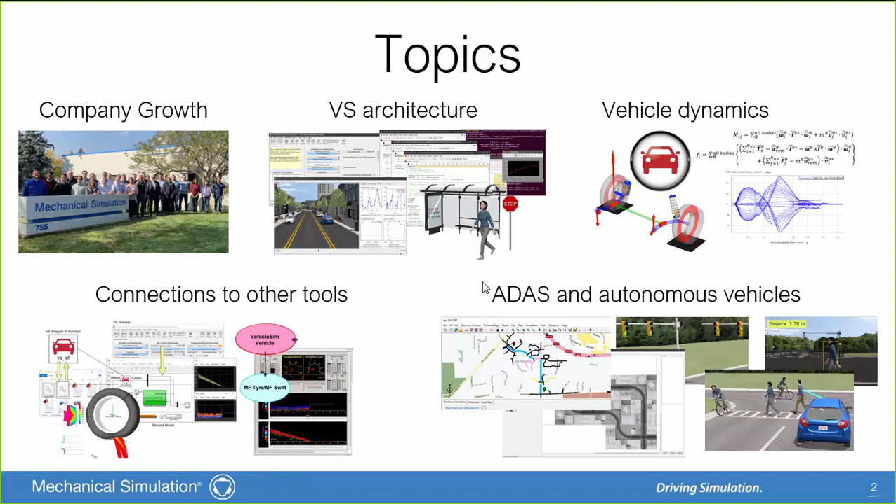One of the things that we have that we didn't a few years ago is an online support center, so that instead of just emailing Ben or Jen with a question, it goes onto our tech support system. It goes into a database so we can track the trends in what problems people are having or what features need to be added, and we can follow up, and we have options for users in the same company sharing information and so on.

With our new capabilities, we've increased our release cycle to make it a lot more steady than it used to be. We're now on a schedule where we make 2 major releases per year, December and June. We almost did it with the 2017 release, but we had some bugs to fix, so there was an early release for May. But in 2018, we were on target. We released 2019.0 on target in December.

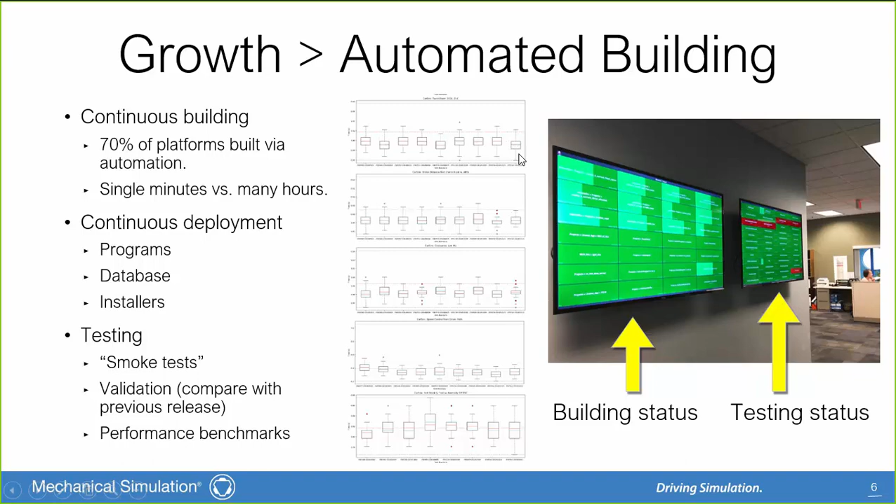We've made many minor improvements in our architecture, things like the database and the animator and so on. Some of those I'll be showing later on in the ADAS examples, but I've got a couple slides here that are substantial and worthy of being discussed by themselves.

A year ago, we added capabilities for running with Python, and in this release we've improved it quite a bit so that in addition to using VS commands within the solver when it's running, you can run Python. On Windows, it's available as part of our installation, and in addition to the VS commands, it lets you add equations and define new output variables. Python gives you function calls, looping, access to libraries done in other languages. I'll be showing later some examples using TensorFlow. The improvement is that we have access to all the VS Solver variables and all the tables.

It's completely installed in 19.0 in Windows, and it's supported in Linux. We had a last minute glitch, so if you want to run Python within the Linux version, you can call us and we can give you the details of what you have to download, but the hooks are all in the solvers to support that.

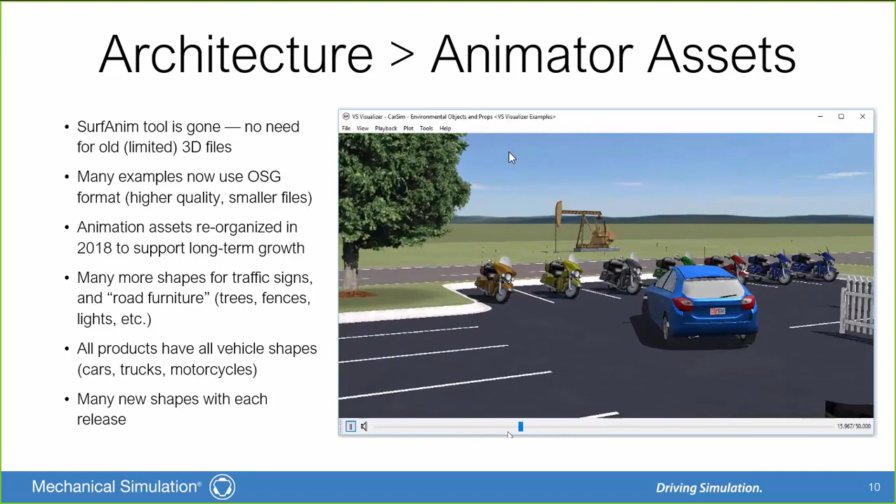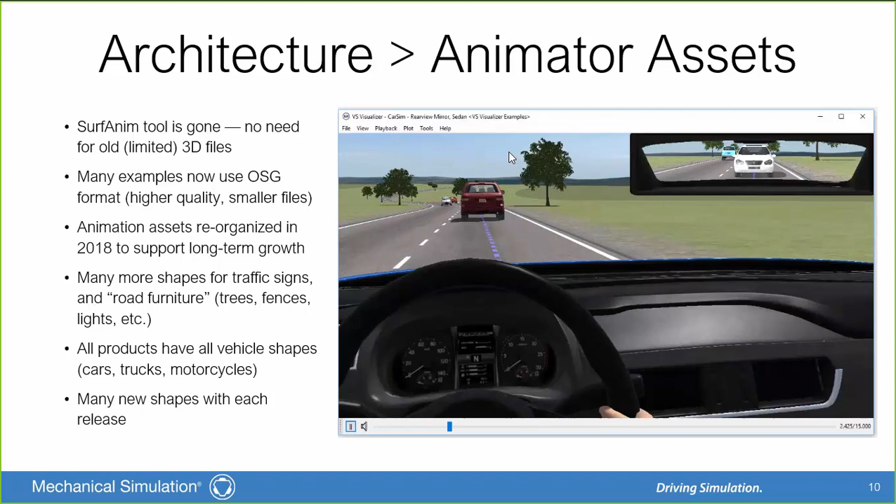Part of our packages are animations. We started out with wireframe animation when the company started. Then we had SurfAnim, which had surface animations. About 5 or 6 years ago, we switched to VS Visualizer, and we've dropped support for the old ones, which means we can now use new files that are much better. They're smaller, so we can put more of them in the system, and they look better and support advanced reflections and lighting. We've reorganized the way we provide these assets so that anything we provide in CarSim, BikeSim, or TruckSim is now available in all three products. We also have done some driving simulators, and some of the art assets we use for those are also included here. So you have trees, bushes, fences, bus stops, buildings, things like that.

Now, next topic, vehicle model improvements. We've been doing this a while now, and there are two big complaints that you users have about our software. The first is that it's too complicated - all those parameters, thousands of outputs, nobody understands the whole thing. Can't we make it simpler? The second problem: except for whatever my interest is, my specialty - in that case it needs to be more comprehensive. Can't you add more detail? So these conflict a little bit.

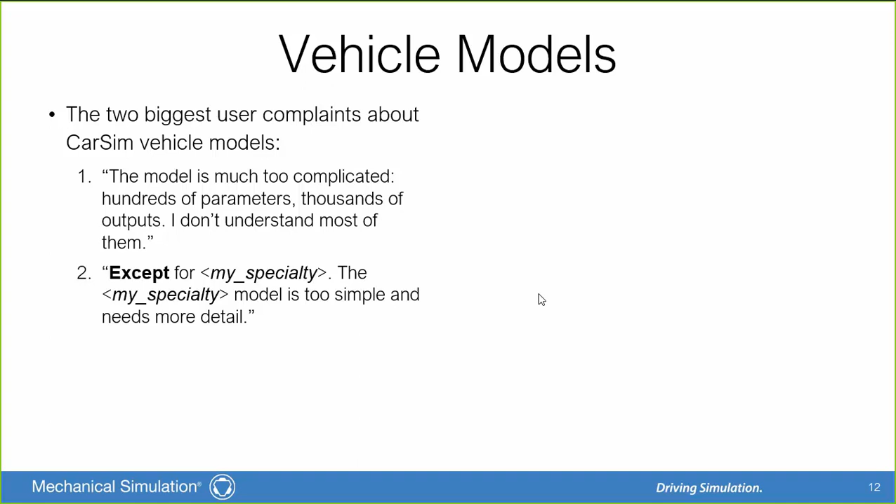Just so you know, our approach is that we make system-level models. Our goal is to have the model reproduce results that you would measure in the field in terms of getting the vehicle motions in response to what a driver does with steering, shifting, braking, gears, throttle. They're parametric models, so it's easy to do variabilities and sensitivities. They have to run fast. We support all these real-time platforms, and typically a CarSim model will be 15, sometimes even 20 times faster than real-time. But because we don't have the detail that you want in your specialty, we have many means for extending the models, which I'll get to later.

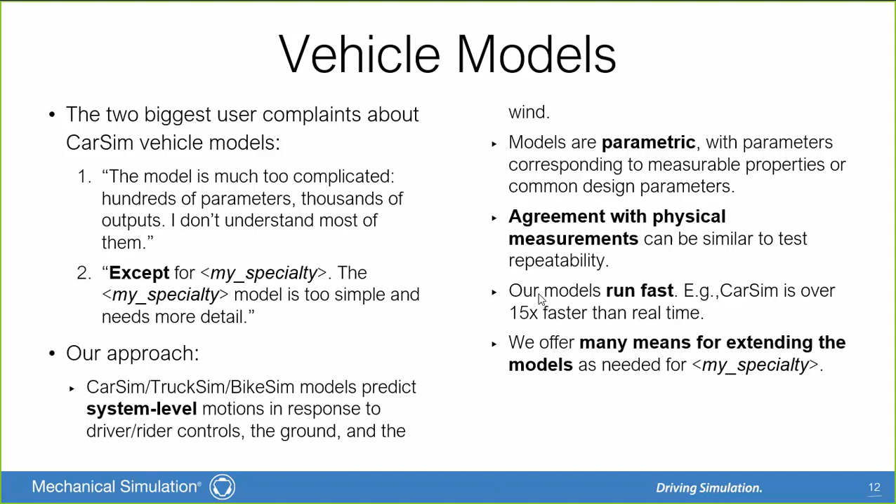Our models are thorough. We have all the 3D connections for the suspensions using rigid bodies, brake systems with lots of options, steering - I think we have 8 combinations of model options for the steering system. Our built-in tire model is pretty thorough, plus you'll see that we support many external ones. We have powertrain, aerodynamics. Something we introduced a year ago is modularity in CarSim and TruckSim. That's opened up a lot of opportunities that we're starting to show off here.

Now, when we introduced CarSim 18.0 - CarSim, as you may know, supports trailers. You had in our GUI a choice of a trailer with one solid axle or a trailer with two solid axles. Our solvers actually supported a lot more options when we became modular. We now just have one CarSim DLL that plugs in, and then you pick and choose which options you have. In 18.0, you could do a 3-axle trailer, but it was hard. Now it's easy. We're looking at the trailer screen up here - this is a new screen that supports 3 axles, and they can be any combination of solid or independent.

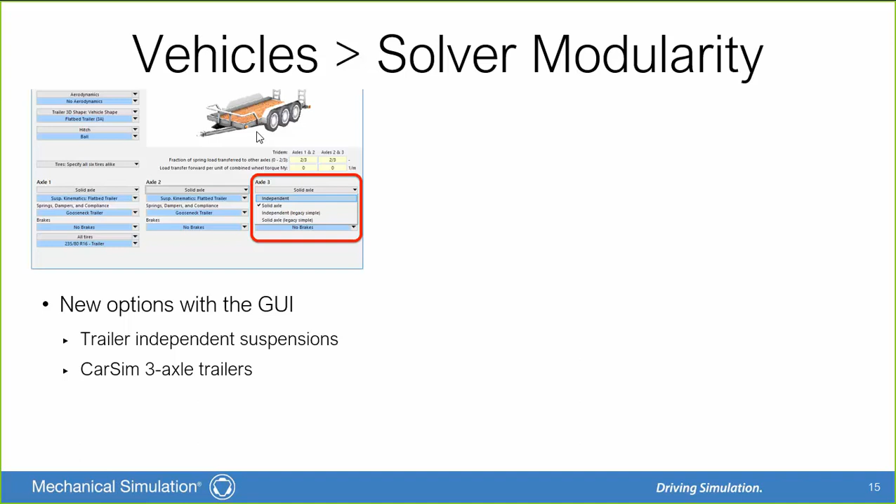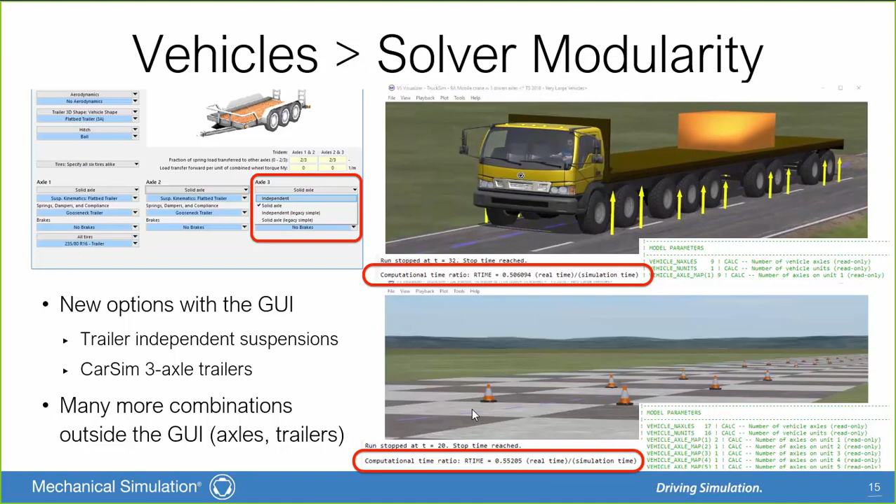We support these, and they run surprisingly fast. Both of those models run about 2 times faster than real time on a Windows machine.

Here's a summary of what these modules are. On the right, under type, we have 4 types: the lead unit sprung mass, a semi-trailer sprung mass, suspension with steered wheels connected to a sprung mass, and the same thing but with wheels not steered. We provide that option because when we get to the big TruckSim models, having suspensions where the wheels are not steered means a lot less calculations and the models run faster.

So to go through these quickly, for CarSim, for the lead unit, we have a basic one that is 6 degrees of freedom. We have that plus a mounted engine that has 6 degrees of freedom to get realistic interactions between the engine torques and the sprung mass and some vibrations. And we have a frame twist with rails on the left and right that you need to get accurate reproduction of sport vehicles, open wheel race cars.

In TruckSim, we've got the basic one plus the frame twist, which is necessary because heavy truck frames are not rigid. And the one with frame twist also has a suspended cab. For the semi-trailers, they're either rigid or with frame twist. And then each kind of sprung mass needs connections to the suspensions that are different.

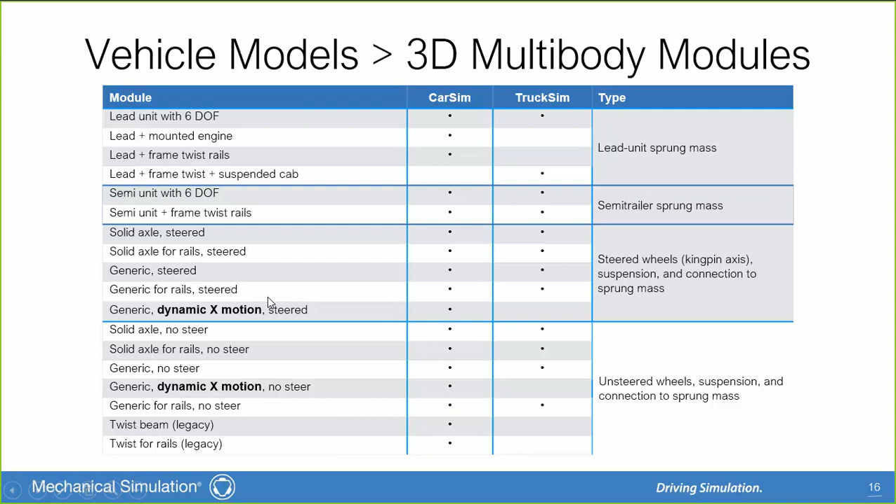So we have to have a solid axle steered for the simple one, solid axle steered to go with rails. We've added a new option in 2019.0, Dynamic X Motion, that I'll talk about in the next slide.

When we went to this modular concept in 2018.0, we were trying to address the need to have a more accurate or more representative model for twist beam suspensions. There was a working group with 4 Japanese OEMs that Dr. Watanabe from Mechanical Simulation was part of.

So the change is basically that we extended our old independent suspension model so that instead of having 1D functions like toe versus jounce and camber versus jounce, we made them 2D functions. So it's toe versus jounce on this side, and then possibly another independent variable would be jounce on the other side. If you don't have the data for that, they revert to 1D tables like we've always had. But now they're 2D tables, so we can get some interactions quite easily just taking the KNC data that's generated routinely. And if you don't have KNC data, you can use something like SuspensionSim or Adams to do the detailed model and replicate the KNC tests.

The result after a year of using this has been real positive from the members of the working group. They're finding good agreement between the proving ground results and the CarSim results.

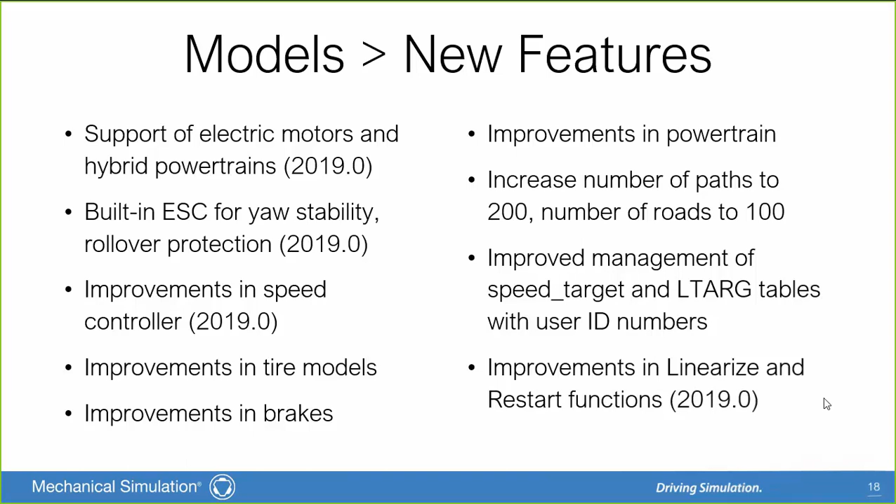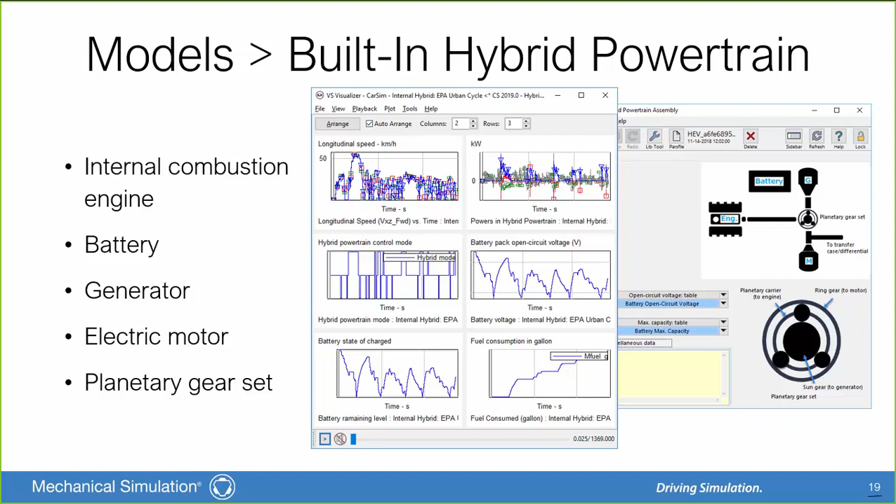Okay, the hybrid powertrain. This is where we are using an internal combustion engine and an electric motor with a battery and a generator and a planetary gear set to connect them.

Now the good news is it works. The bad news is it's kind of slow. Here's a log file for that run that was made in Simulink.

So this is running an EPA cycle. It's 1369 seconds long, so 1200 seconds would be 20 minutes. So this is 20 some minutes. It runs a little more than 2 times faster than real time, which means if you run this on my machine, it's going to take about 10 minutes to complete.

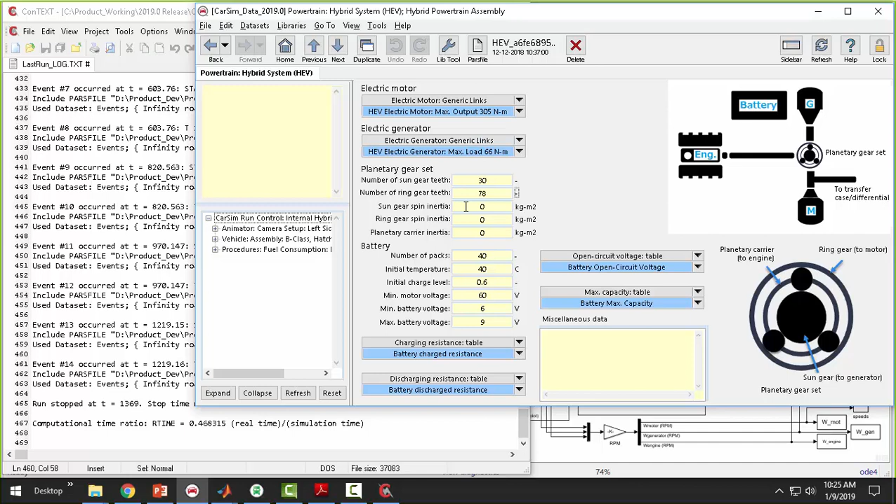Now what we've done for the 19.0 is take those equations, the model, and build them in. So now we've got the engine electric. Here's the engine model, just like we've always had. And here's the powertrain assembly. We have the battery, the engine, generator, motor, planetary gear, some parameters involving the planetary gear, summary information, and lots of tables that have nonlinear relationships.

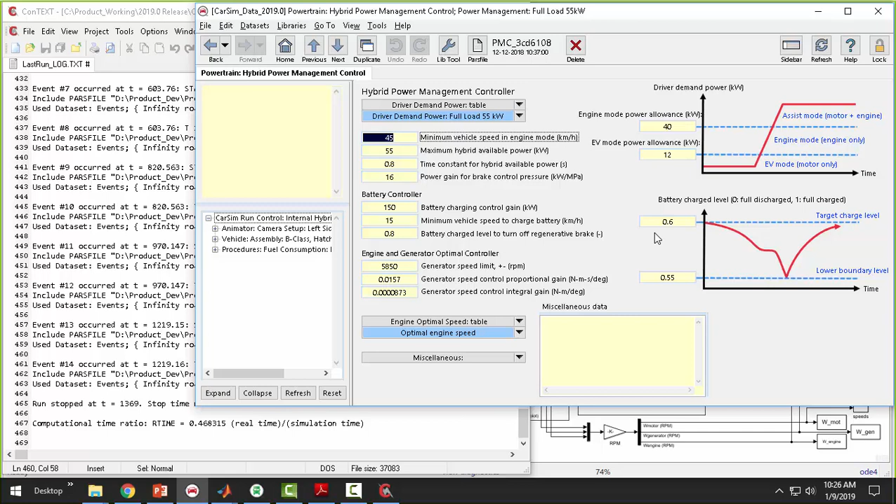If we go up, that's the assembly. The power management also is built in. It has a new screen that's basically telling whether the internal combustion engine should be powering the wheels, recharging the battery, or maybe turned off. And this also has just lots of tables in here—or not a lot, 2 tables.

So how does it work? Well, first the efficiency. This time, instead of running twice as fast as real time, we're going 10 times faster—I'm sorry, 5 times faster. Simulink was really slowing it down. This means our 20-some urban cycle simulation is going to be done in about 2 minutes.

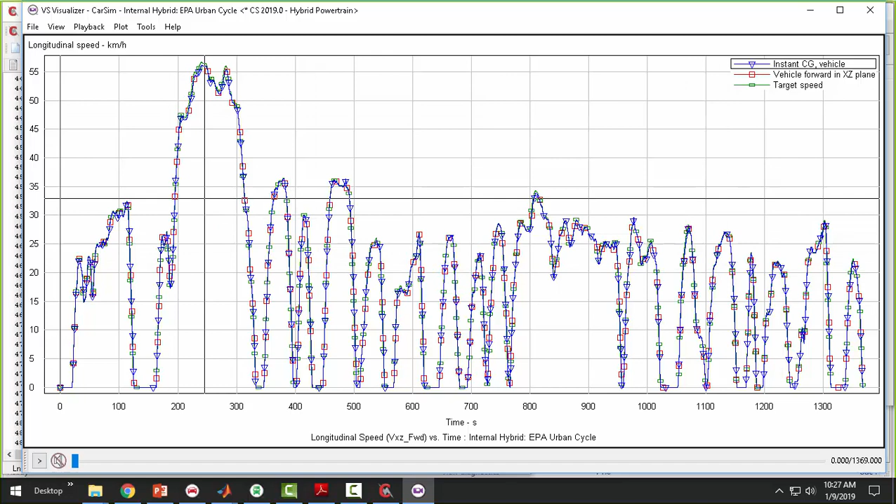And these are the kinds of results that we get. This is the cycle up here as the speed is going over that period of 20 minutes. Then we're getting information about the battery and the efficiency, fuel consumption, things that you're interested in if you're using a hybrid simulation.

Okay, the next topic, the next improvement, is to build in electronic stability control. We've had examples doing this with VS commands. Now, since they've been required by law for cars since 2012 and in trucks for just a few years, we're putting this in. It's a simplified version similar to our ABS controller for brakes. So here's an example in TruckSim.

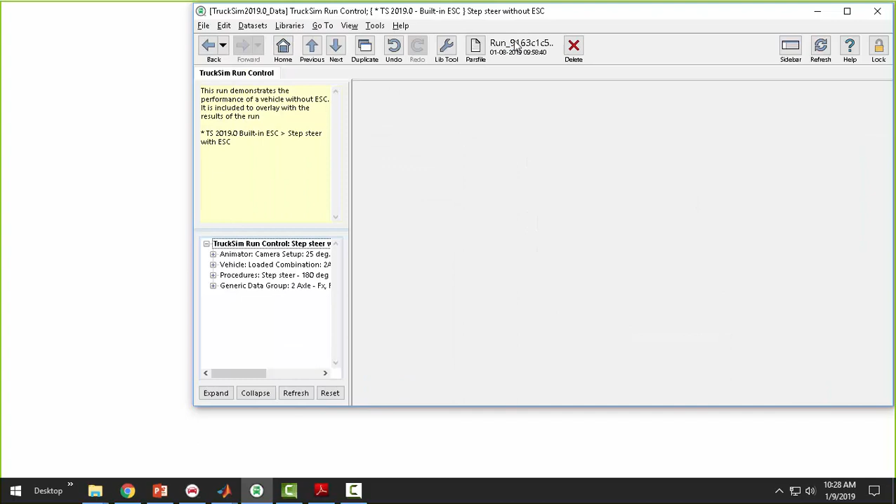So now we'll look at it with the controller on. Okay, we see the icon, the stability heads-up display coming, and it goes through the maneuver without rolling over. That's good.

We got the controller algorithm from one of our customers, a truck company, to use in a driving simulator. So it's been cleaned up, so it's fairly generic and easy to apply in different applications. It's predicting what the yaw rate and the lateral acceleration will be.

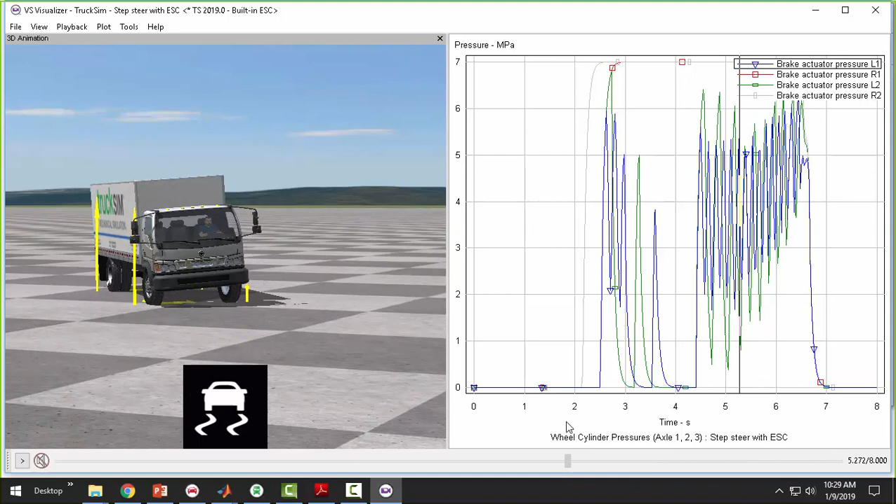So you can see here that when the predicted yaw rate, which is in blue, is small, it's off. When it climbs up, the controller kicks in. That was the angular velocity. Here's a similar thing for lateral acceleration. And then this is the braking that is applied. So now the controller is in there, selectively triggering the brakes to reduce the acceleration. It's lowering the speed quite a bit.

Let's see, where's my speed? Ah, yeah, here we go. So the result of this is that it does slow down, because that's kind of the only surefire way to stop the rollover. Now in CarSim, it's often used for things like sine with dwell testing.

I want to show a sequence of sine with dwell tests that's done for—oops, I need to go to that data set, that is miscellaneous. Here we go, sine with dwell. The first thing you do is steer, ramping up the steering wheel angle linearly until you reach 0.3 Gs, and then you reset and go the other direction until you hit 0.3 Gs.

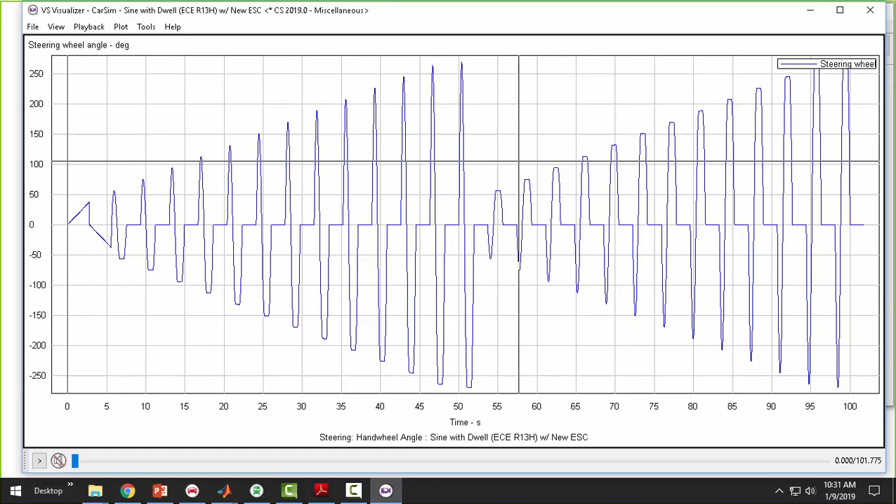In making this simulation, we turn writing to the file off during the transients between sequential tests, so you don't see the uninteresting parts—we just see when it's doing the tests. And then it gives this sine with dwell waveform that increases as you go along until a limit is reached, and then you do it with the opposite sign. We're looking for results like this where it remains stable and controllable the whole time.

When we look at the controller, it only has 3, 6, 10 parameters here. One parameter is a vehicle understeer gradient—that's what it uses internally to predict what the response is going to be.

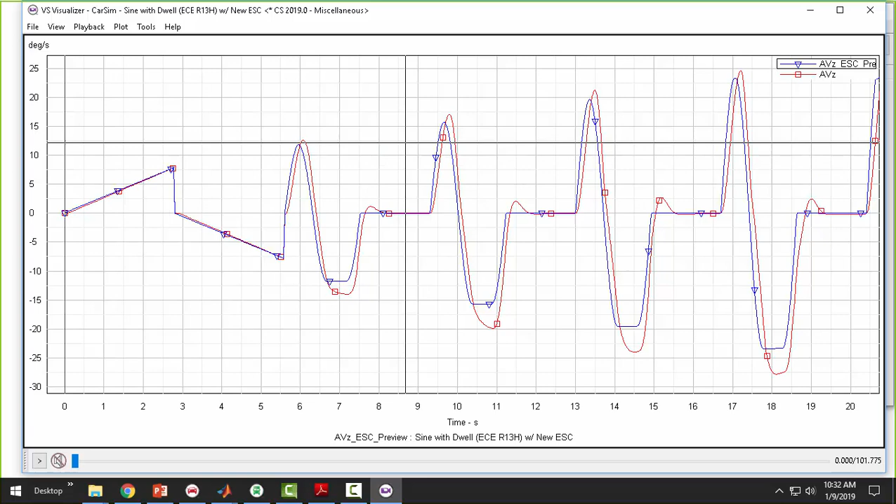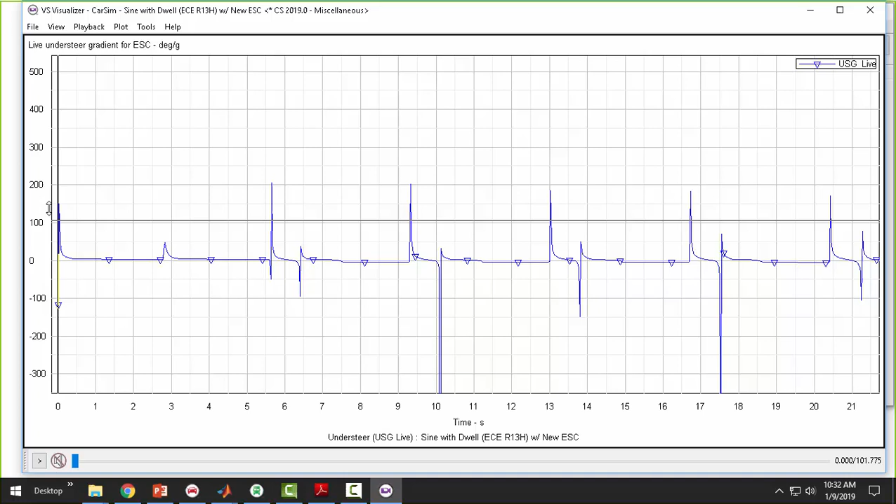So let's go back at these plots here, and we'll look at, say, this is the angular velocity as a function of time for those tests. Red is what it really is, blue is what the controller thinks it will be, and it's right on for the early stuff. The reason we're able to match it pretty closely is because one of the output variables is the understeer gradient as calculated for the assumptions of that controller. So I'll zoom in and look at this.

Show the values up there, and you can see 3.23, 3.189, and then we go back and see that the parameter that was put in here was 3.19. So it's mainly doing a test like this, you can see what the understeer gradient is and put it in there. So it's very easy to tune this controller to your vehicle. It's the same controller in CarSim and TruckSim.

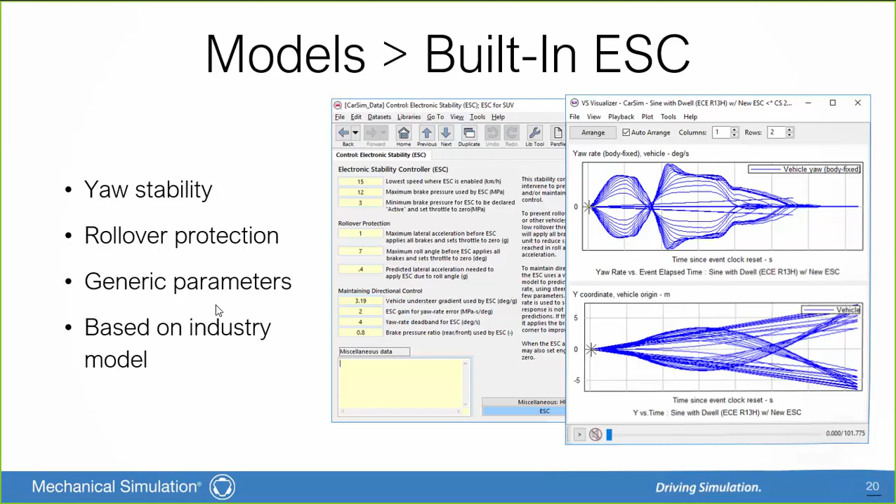Now the way we connect in MATLAB, LabVIEW, and ETAS is that the solver runs in that environment, but it's getting data from one of our standard databases. So if it's CarSim, you would have the CarSim database installed. If you're, say, in Simulink, you're running under Simulink, but it's getting data from the CarSim database. With the FMI, we support that also.

But with FMI, we also have the option of making a standalone unit that's completely self-contained. So that has all the vehicle properties, anything that's specified from the database. You make that FMU and you give it to a colleague on a different computer that doesn't even have CarSim installed. They can run it in their environment. Now they can't change anything. So it's mainly useful for control engineers who view the car as a black box that just has inputs and outputs.

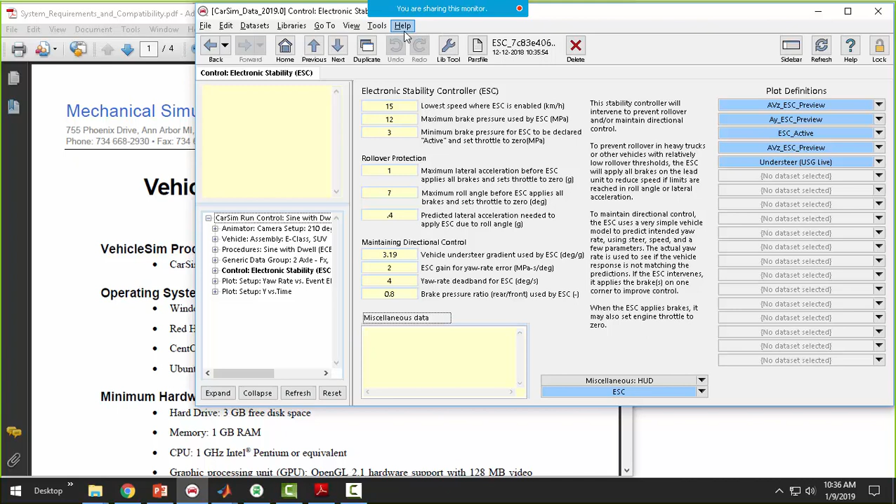We run on 8 real-time systems that are listed here. We support a lot of third-party tire models. Okay, when it comes to what we run with, up here in the help menu in our release notes, we have system requirements. This is the document that you get, and here are a lot of the real-time systems. This table lists most of the tire models. They're all available on Windows. Some are available on dSPACE and some are available on Concurrent. It depends what version. It also depends which of our products, CarSim, TruckSim, or BikeSim.

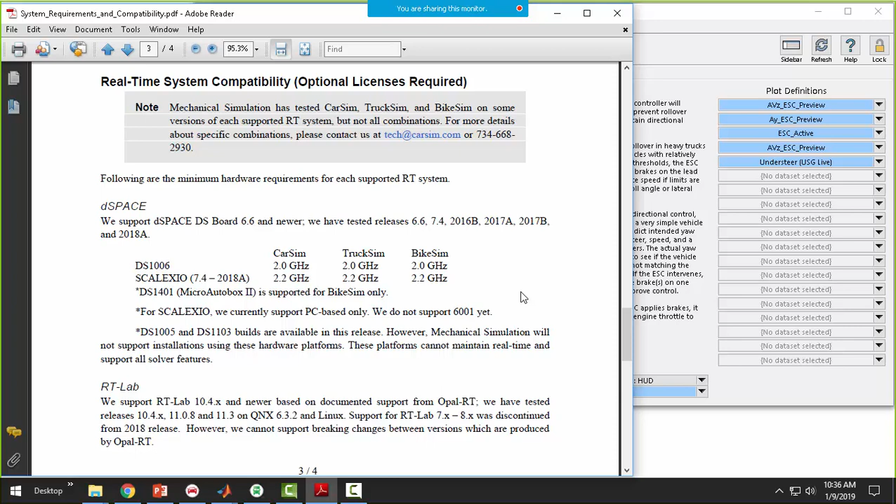We have information in this document about all the real-time systems that we test. We try to be up to date with the current releases, although very often if there's a new release from dSPACE and they've changed things, you might have to wait till our next release so we can implement those. But I think we're pretty much caught up now. This year we've added support for the Michelin TaMe tire, and we have taken what used to be the CarSim plugin for Epic Unreal and made a VehicleSim Dynamics plugin, and I'll be showing that later.

Connecting to outside software, we have lots of application program interfaces, APIs. We plan in the next few months to make a bundle with these to make it easier for programmers to have an SDK, a software development kit, but they exist right now and are in wide use. The Solver API lets you run our solver from external software. That's used in driving simulators and some optimization things.

A few years ago, we standardized the way we connect with tires. There's an old standard called STI that was made for Fortran maybe 30 years ago. We've taken our own version of it that's compatible with C function calling protocols. That's what we use for most of the tire interfaces, and it's been used by some of you OEMs to connect your own tire models into CarSim and TruckSim.

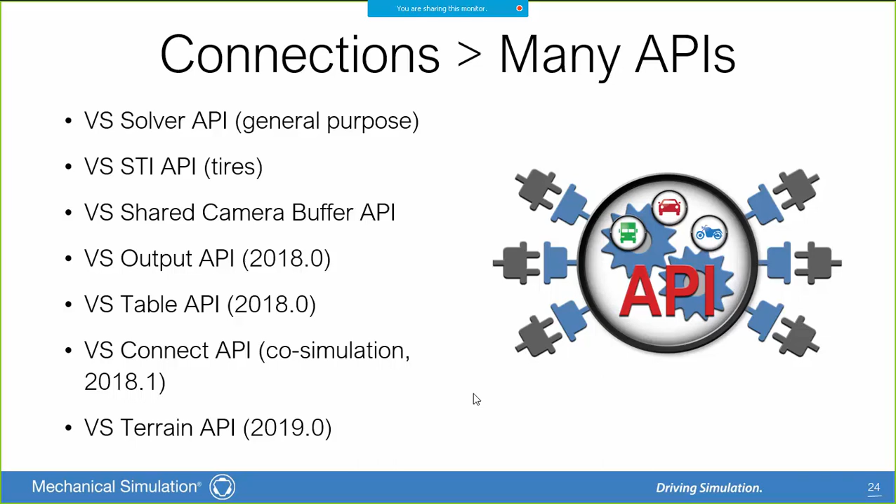And new in this release is the Terrain API that lets you make use of ground information from outside sources in a generic way so that you can connect your own ground to our stuff without us knowing about it.

Okay, now the rest of the presentation are examples in the area of ADAS and autonomous vehicles. But before I can show anything, I feel compelled to give a quick review of the ways that we describe these things. Our vehicle models are based on physics. The physics equations all use global x, y, z coordinates, yaw, pitch, roll angles for orientation.

When we're talking about traffic and intersections, it's more convenient to use path coordinate systems. So if we have a path, the coordinates are station S, where you are along it, and L, lateral distance from it. You'll see this with some European technical papers. They'll call them S and T, but we use T for time, and we're not going to give that up, so we use S and L.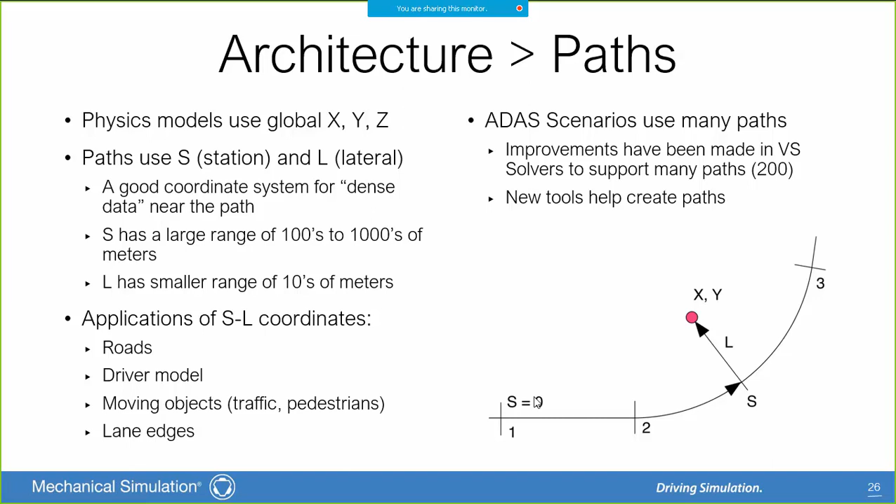This is real good for defining movements of traffic vehicles. It's necessary for defining roads. We've used it for 20 years for our driver model, more recently for the moving objects and lane edges. And a lot of making ADAS scenarios involves setting up paths and connecting roads.

Now here's an example; this was made in our previous release. Notice we have walking pedestrians that are moving. Events are being used down here to stop the car, wait for the pedestrians and the bicycle to clear it, and then speed up. Now I want to show a few other things, so I'm going to kill that and go live again. Okay, we'll look at the same example here, and I want to talk through it a little bit more.

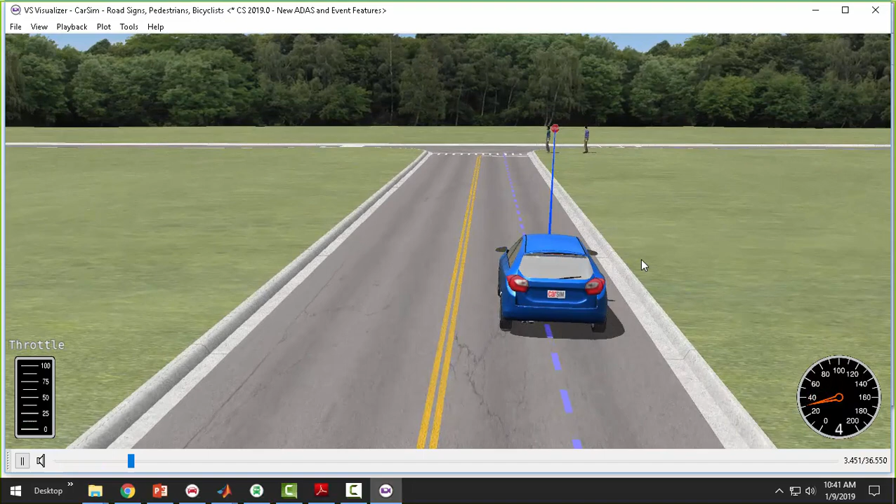So we see that we have two pedestrians waiting here. Neither of them are moving. They're both showing realistically standing. They're not like walking and frozen. Now the woman starts walking. The guy starts walking just a little bit after she did. They're walking at different rates. He's going to catch up with her.

As they're walking, their feet touch the ground and stick to it. They're not doing any Michael Jackson moonwalk kinds of moves. They're maintaining that realistic motion. When the bicyclist comes around and she turns, she's leaning into the turn. The lean is physically correct. It's v squared over r, the lateral acceleration, divided by g. Take the arctangent of that and you get the lean angle. The other biker keeps going straight.

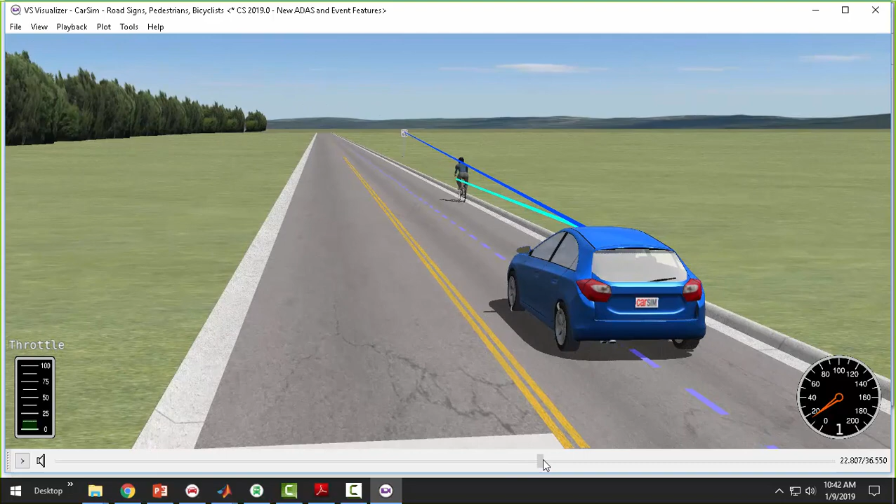When everything is cleared, we go through the intersection. We see the blue beam connecting with a speed limit sign up there, so it's changing the speed used by the controller in the car. Now it detects the bike, and you see that it's going to give her some respect here, moving to the left to give some clearance.

So the way we do that is with a new feature that simplifies that. When we have our events now, there is a group ID that you can check. And this ID is bike lane. The condition here is saying that if our speed is more than 5 meters per second and our closest object is a pedestrian and the pedestrian is closer than we want them to be, then we will go here and change the target that we're using to drive, and this is updated every time step.

It will move it to the left. We'll keep doing that until the type of the closest object is no longer pedestrian. Then we go back. So we'll look at those same events here in the echo file at the end. And this is a new feature, the event ID. The one that has the ID of 100 is watching the stop sign.

So is our closest object a sign? And if it is, is it a stop sign? Or is it a speed sign? Or is it a red light? Or is it a yellow light? Then we have another group here with ID 110, and that's our bike lane. If this is not 0, then we would do something, and this can go back and forth.

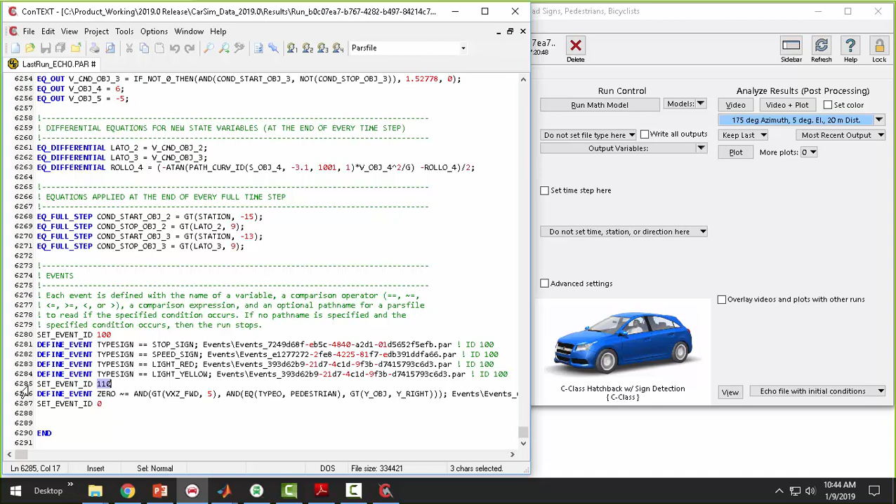Now, if you've used events, you know that you will sometimes want to just reset them all. And that gets complicated if you have multiple subsystems in there, or if you're looking at different things, like we have the bike lane detection and we have the sign detection. So with these IDs, we can reset one group and leave the other intact. And that happens in this example. If you look at the log file, you'll see that there's some resets involving the sign detection, but this other sequence where it's looking for the bike position stays intact the whole time.

Okay, go to another example here showing a new feature. This is traffic signals, and we'll take a look at the existing one first, which is not what we ship. It's one that I modified.

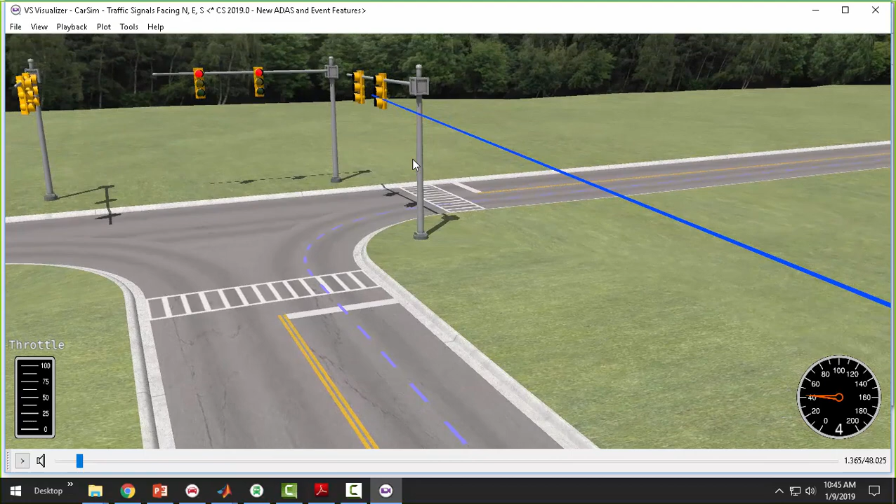We have 3 lights up here. We're looking here at vehicles going south. The straight road is north-south. The Ego vehicle is coming from the east, driving west. There's a red light facing us and a green light facing south.

You see the blue detection ray there. It's seeing both of them. Now that's not good. It's going to get real confused because we want it to only see the red one. And in past versions, we put some invisible objects in there to block it, but we have a much cleaner solution now in 2019.0. We'll look at the traffic lights here.

So this is the data set used for all 3 of the traffic lights. They're just located in different places. And so we've got where it's located using symbolic stack things, so it's reusable. The type of shape is a segment. In all the past versions, you had 2 options, a cylinder or a rectangle. Now we have 2 more.

The segment one is what we intend to be used for signs. And this has a limited visibility angle. If I say 40, that means that its whole field, kind of a field of view from the object side, from the target side, is 40 degrees. That's 20 degrees on each side. So if you are facing the stop sign, you can see it. If you're within 20 degrees of facing it, you can see it. If you're more than that, you can't.

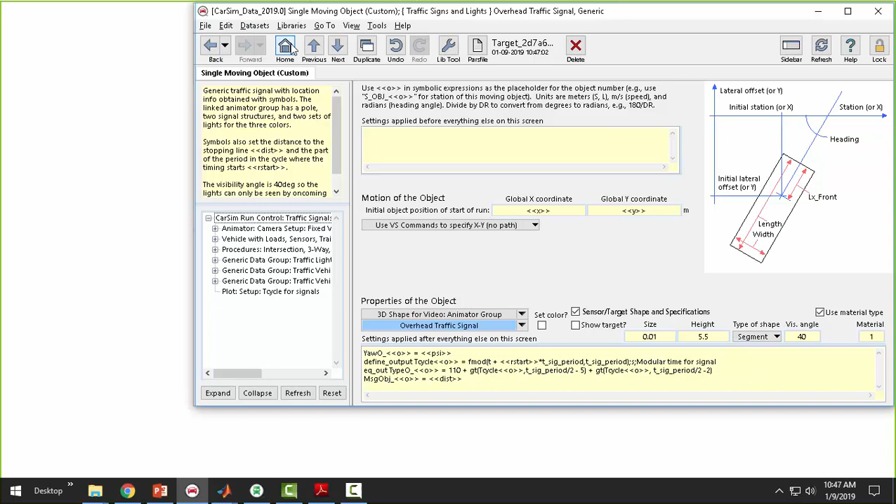And I said stop sign, I should have said traffic light. So if you're within 20 degrees of facing the traffic light, you can see it. Otherwise, you don't. So we'll redo that run. Look at the video. Now we don't see the green ones because we're more than 20 degrees away, but we do see the red ones.

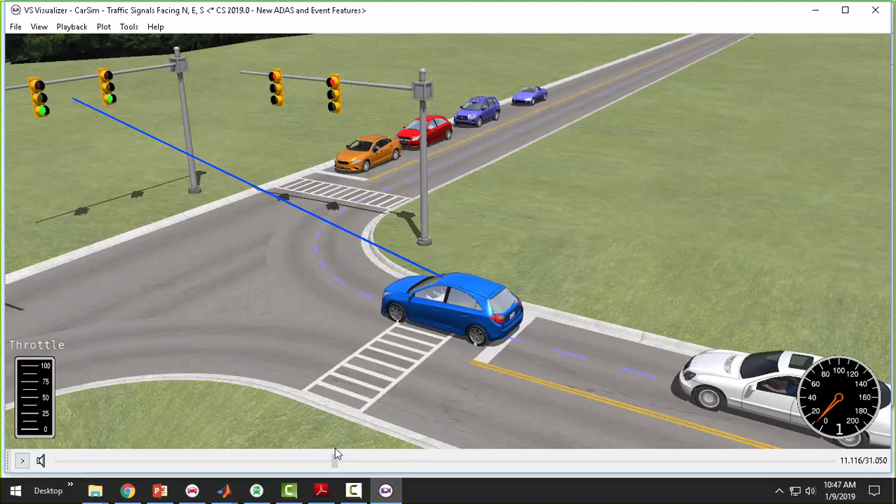Now you notice that those traffic vehicles are slowing down pretty realistically there. That's another big improvement we made with this release. We also see that the traffic vehicles following our blue Ego vehicle slow down, and then when it speeds up because the light has turned green, they follow it well.

Also, look at where the rear wheels are. When our driver model tries to follow the dashed blue line there, it keeps the center of the front suspension pretty much on that line, and the rear wheels track inboard due to off-tracking. The rear wheels are trying to follow where the front wheels are. And that just comes from the physics of the vehicle dynamics.

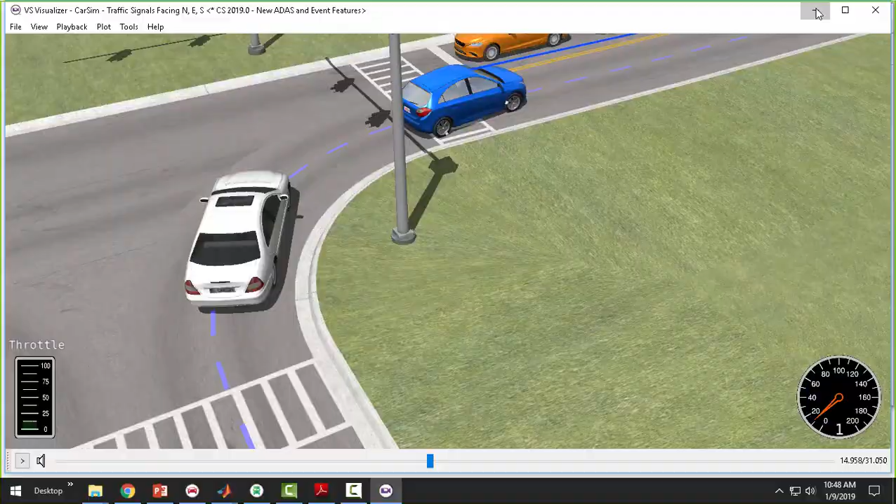These other vehicles don't have full-blown vehicle dynamics. This is not a CarSim model. This is a moving object. But it's tracking realistically. The front wheels are following the dashed blue line. The rear wheels are tracking inboard. So let's take a look at how that's done. I've got traffic vehicles here following the Ego. Here's the one right behind it.

Now in the past, we've had 6 options here for controlling it. The first 3 control position explicitly. That's all we had maybe 5 years ago. It had no true degrees of freedom. It just went where you told it to go. So we could put a formula for station, like be some variable distance behind the Ego vehicle. But the only way you would get speed would be by doing a finite difference.

Then we made speed a built-in variable, and if I choose one of these, it adds a degree of freedom. So now we would be controlling the speed, and then the solver would numerically integrate that speed to get the position. And now with our new one, we've added another option, that we will control the acceleration. That becomes a degree of freedom. And that's what we're doing up here.

This is a term in the documentation, a speed error, that the built-in controller is going to change the acceleration to try to maintain a following distance that's speed dependent on what's in front of it. So when we do that, we have a degree of freedom for the acceleration. That's numerically integrated to give us the speed. That's numerically integrated to give us the position. So that's 2 degrees of freedom.

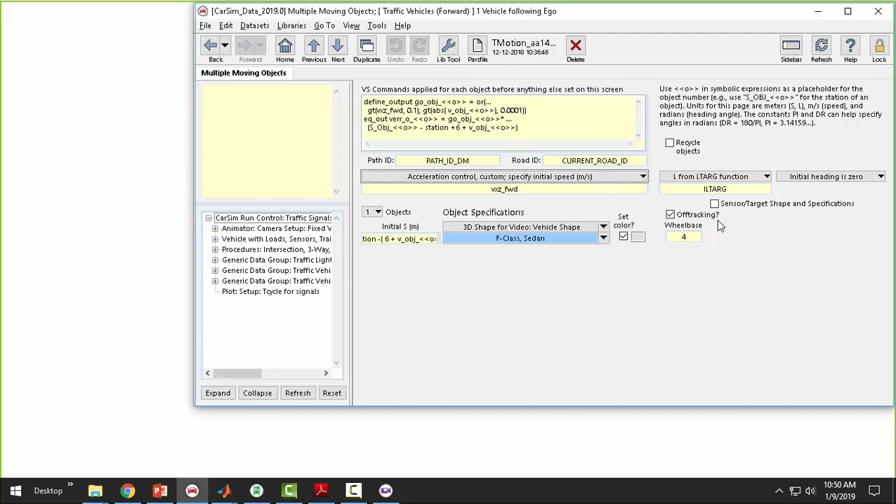And then within the last year, we had added this off-tracking option. We revised that a little bit with this release to make it more robust. That is adding a differential equation for the yaw angle. So the yaw rate is integrated to give the angle, and that gives us the realistic off-tracking that we saw.

When we do the caravan, it's real simple. We just have each one following the guy in front using the same control law. The cycling that we have for the light is real easily changed. A whole cycle is normalized to be 1. I had it at 0.7. I'll change it to 0.4 and rerun it.

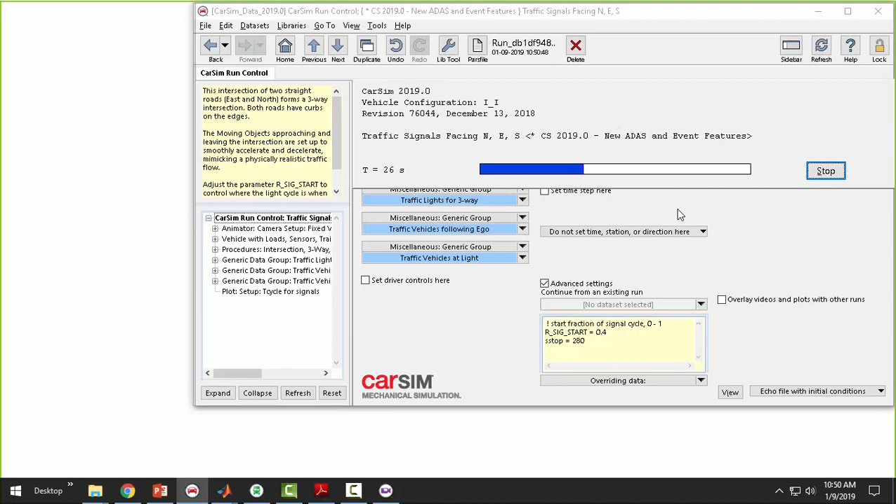So here we have some speeds. The control for our lead vehicle here was smart enough to know that it has to come to a stop if it's a red light, and it can keep going if it's a green light. Because it's acceleration control, if the thing switches, it doesn't have a discontinuity. It maintains continuity by staying within reasonable acceleration limits.

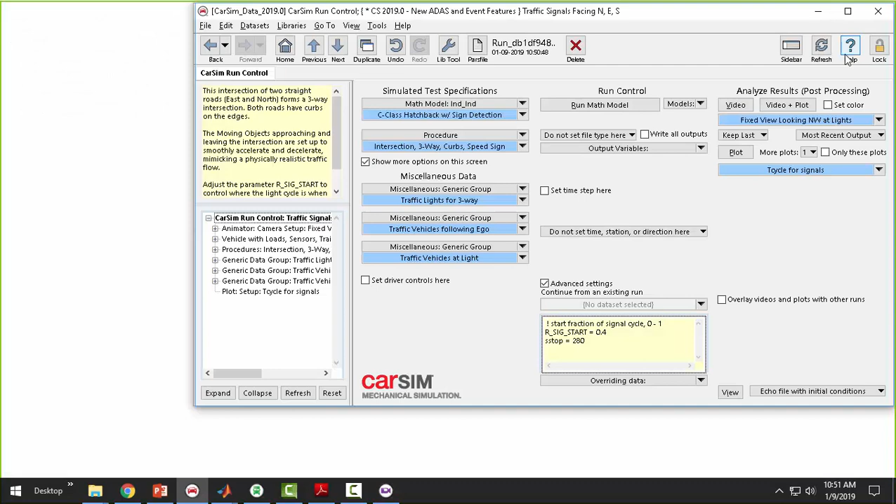And now we have the red light over here. These guys stop in a physically believable manner. And then when it changes to green, they all accelerate to follow it. So that's 2 examples that we have, and I've got 2 more.

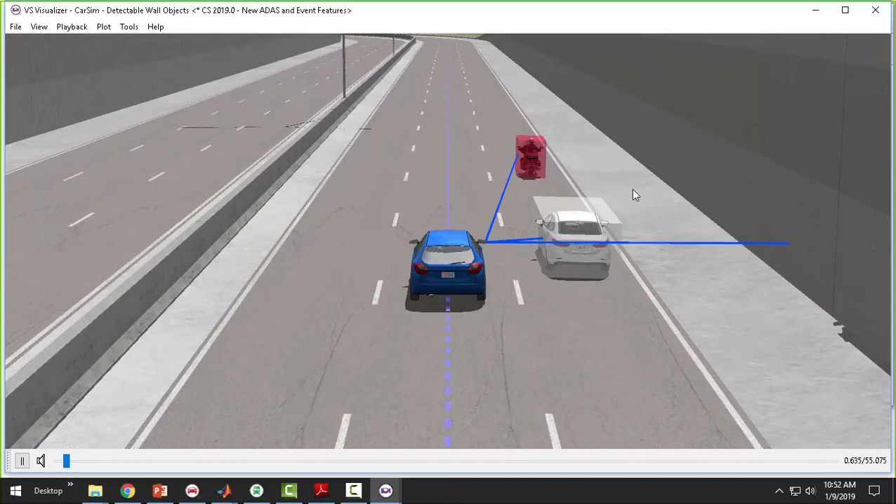A request that we've had for quite a while, especially from Japan, is to be able to have walls to the side of the vehicle. So here is an example. So we see that we have our Ego vehicle here that's blue, a motorcycle that's red, a white vehicle, a wall, and an access road over here with a dump truck, I think.

The ray that goes from a sensor that's kind of where the rear view mirror is here to see the wall, it's blocked by the white vehicle, so we've got the occlusion going on there. And now we get to a point where the wall is no longer blocking the view of the truck here, so we can see that.

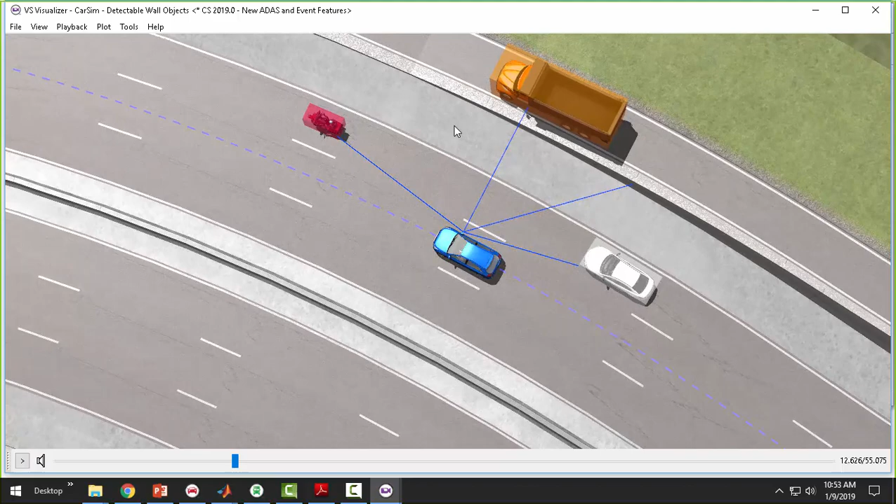And you notice that the wall is curved a little bit to follow the road. And as we go further, there's another wall, and this has a more dramatic curvature. Now, how do we do that? We'll look at the procedure here, go to the lanes.

In addition to the cylinder, rectangle, and segment, we now have the option of having a polygonal shape. And we say polygonal instead of polygon because it's not necessarily a closed polygon. It's defined with a set of coordinates. You can choose S and L to follow a path, or X and Y.

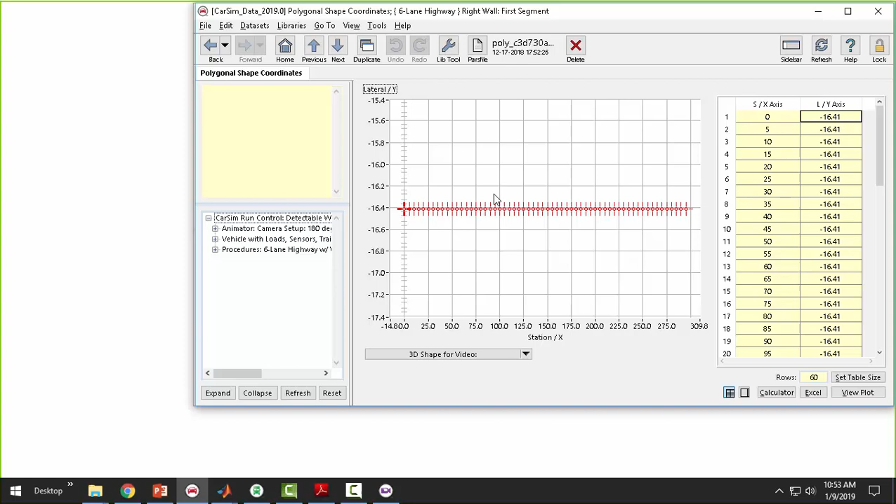In this case, when we look at the S and L, they're very simple. It's just 5-meter intervals in station, and they all have the same lateral offset there. But because this thing is tied to the specific path and road that we're on, it gets the curvature properly. Now I have one more.

We'll take a look at this first from looking at the data. We will go to a building here. In this case, we're not using SL coordinates. We're specifying its location with X and Y coordinates. The polygonal type is X and Y. And this actually is a polygon. It's just describing an irregularly shaped building.

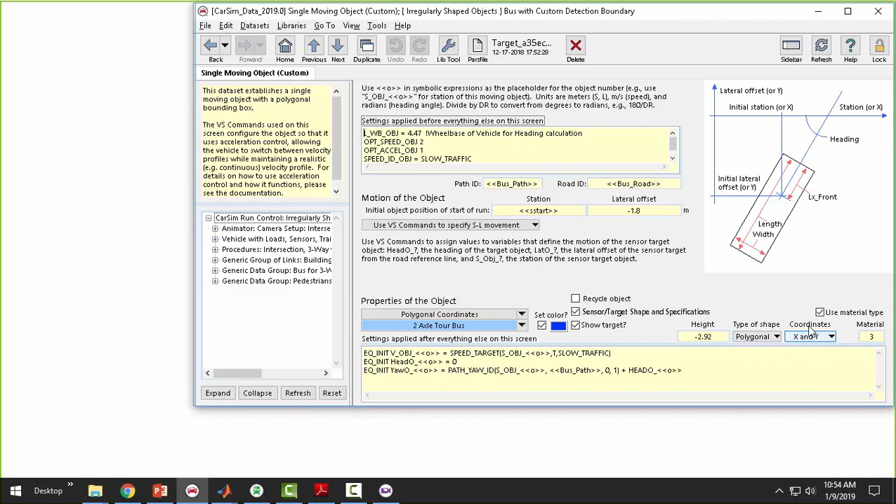Now we have also in here a bus that is using X and Y coordinates. And this is mainly here to show that we can handle an arbitrary shape. I wouldn't say this is the best way to do a bus, but it shows it can be done, that we're not really limited. We can have a lot of points. The shape can be really irregular.

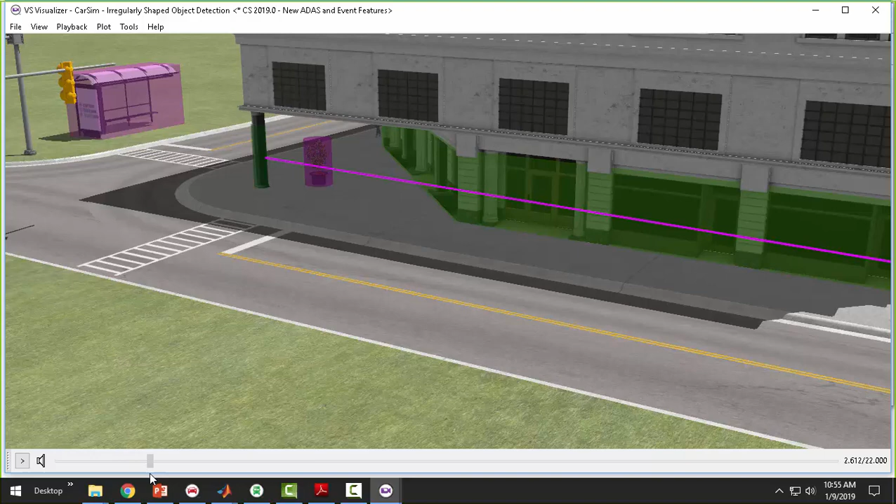We'll go up and see what this looks like. Looks like this. The green around here is what the internal model thinks that the target is shaped like. The building with the textures is just eye candy. Now, as we go through here, we see that there's a vector connecting the column. It's seeing the correct traffic light.

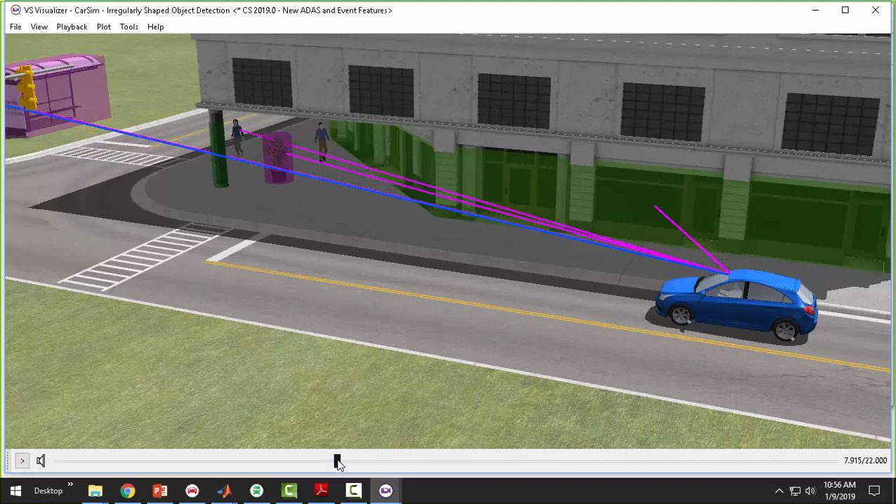Now we get some pedestrians. It can't see the pedestrians because they're out of view of the building. But now it does see them. If we had a rectangular building, the corner might have blocked them, but it's irregular, so it's got a clear view of the pedestrians. One goes to the crosswalk, one comes towards us, and over there in the background is the moving irregular object that is a bus.

Those four examples that I showed are using our built-in target objects that can move or be stationary, with controls for handling them, and our built-in sensor that is using just 3D geometry to calculate a vector from the sensor location to the closest point on the object, and then about 20 other variables that you might be interested in.

A completely different way of doing this is to use the visualizer. Now our visualizer is showing a full 3D world. It has things that are transparent. It has the walking pedestrians with their arms moving, gaps between the legs.

If you have a big truck and a sports car on the other side, you can see the car underneath the truck. We can have multiple cameras, so we can have as many views of these as we want. And the feature we put in a couple of years ago is an API so that you can share those camera views with other software.

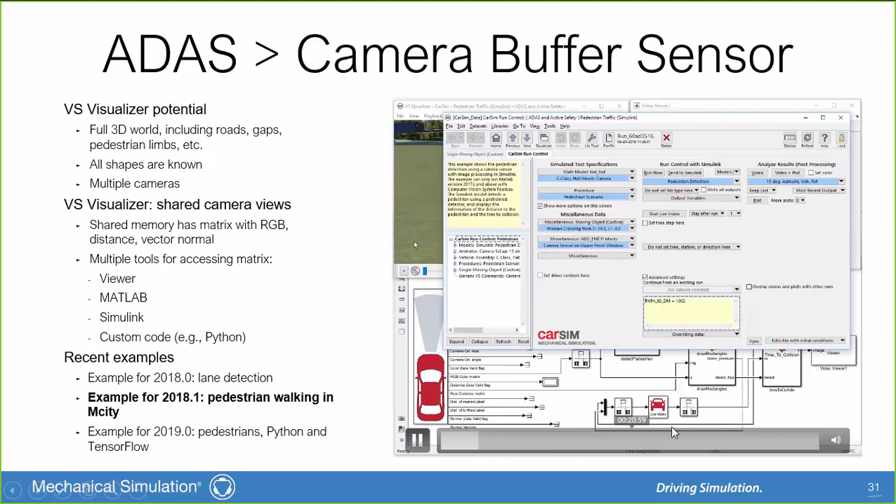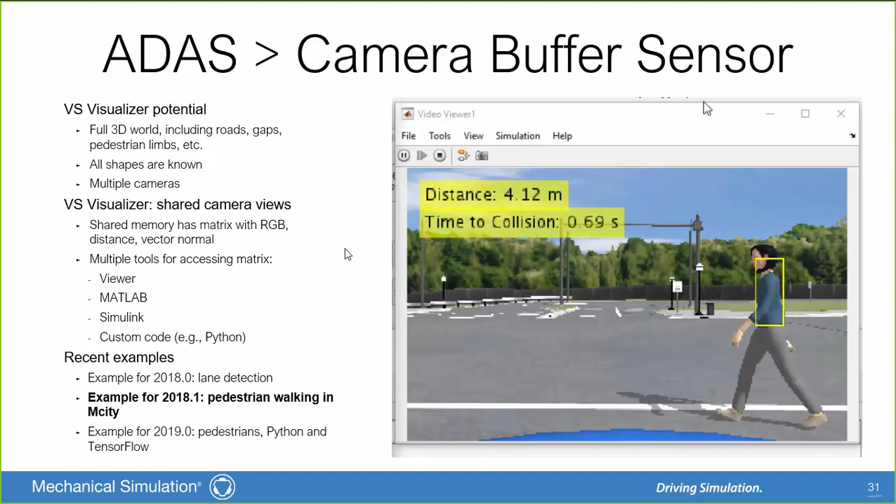This is a pedestrian. When we play it, we see the icons down here. The animator sets up - we run this under the control of Simulink. It's a little bit slower than real time, but not much. Now this is all Simulink showing us what we're seeing here. The identification of the pedestrian is with the Simulink library routines.

So left is the visualizer, right is the pedestrian. There's a rudimentary control in here to not hit the pedestrian in this Simulink model.

Now, a neat example that we've added in the 2019.0 release is to do this without Simulink, using Python. In this case, the visualizer is providing a camera running the same example I showed earlier with the bikes and pedestrians, but instead of having our built-in simple sensor model, it's got code in Python processing this. So now go ahead and make the run - it generates the files, starts our visualizer. Then you go into a Python environment, give commands to start the run. We're running CarSim from Python, making use of a library called TensorFlow from Google that's open source.

So this identification is not done by us, Mechanical Simulation - it's done by TensorFlow, an example from us. That example is available on the website. Yeah, and Jeremy's keeping me honest here - that example, because it involves open source stuff, we don't have it in our installation, but we have it on our website. So you can download the example, but you have to install Python and TensorFlow yourself.

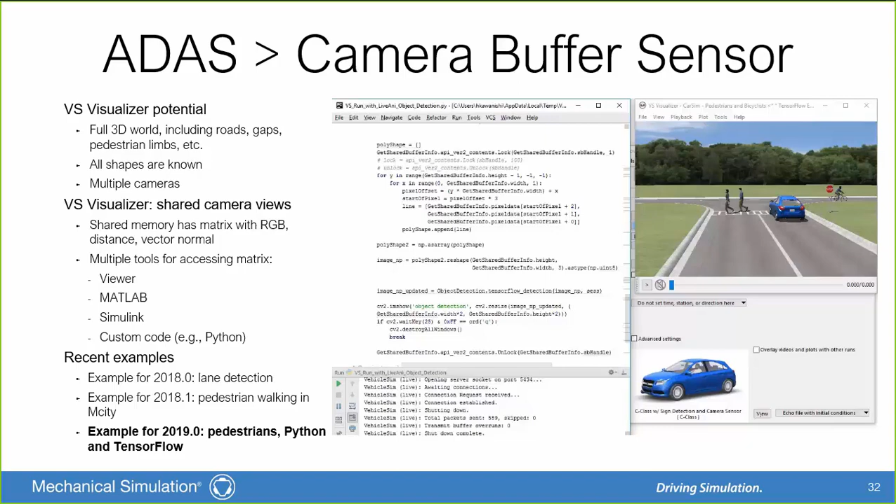Okay, the next thing I wanted to talk about is how we're getting these scenes built. The ones I've shown you so far were made using the standard road building tools in our products. But there's been a lot of interest in being able to make more complicated intersections and road geometries and represent things that are in the real world. So a year ago, we added an interface to our GUI and browser called the Scene External Import Screen that can bring other data in and get it into CarSim, TruckSim, or BikeSim.

The first tool that we had is called the Atlas web page that's on the CarSim website. It gives you access to Google and Here mapping services. Here's an example that's been speeded up and edited so I can show it in a few minutes, where we take a real intersection outside of Ann Arbor, from I-94 to Jackson Road. We find it over here - this is Google Map showing us what the intersection is like.

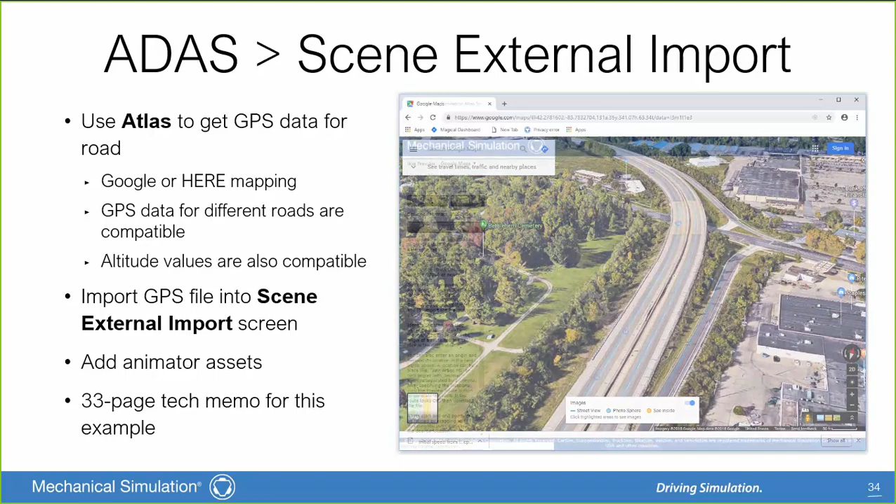Now we'll go into Atlas and zoom in and find that same intersection. We're using Google Map here, and Google wants to give us directions, so we use the interface of having a green start point and a red end point. But instead of getting directions, we click a button that says download, and it's grabbing GPS and altitude data that we can import using that screen. Now it's also giving us a reference point where 0,0,0 in our XYZ coordinate system is.

We add some animation real quickly to get the bare minimum, and this is what we just downloaded. Now we want to do the whole exit here, so we'll move the endpoint, force it to take the exit, download that, import it. The box is unchecked to generate a reference, so this will use the same GPS coordinate system as previously, so the XYZ coordinates should match. We'll make one more here showing the local road - this is Jackson Road. We can adjust those points as we need. Download that.

Bring it in. Add some animation effects, and now we'll see the three sections, and we hope that they're all connected properly.

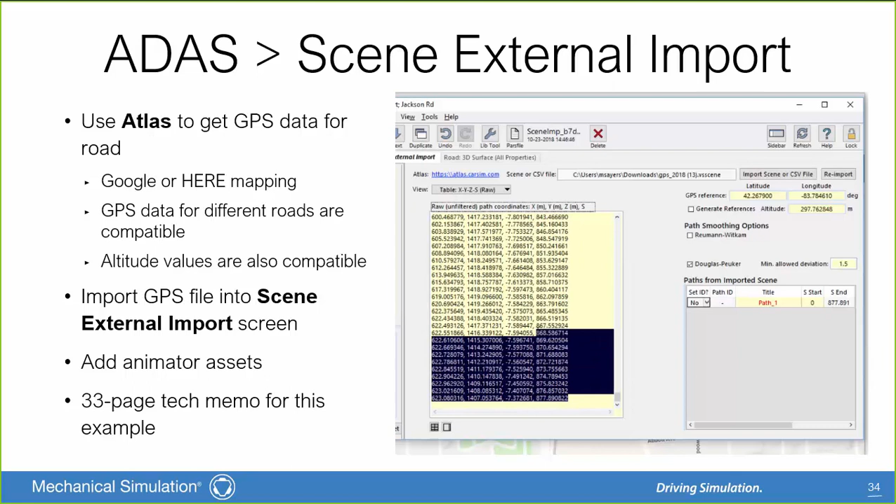So we'll do some smoothing in here to get the interstate, to get rid of some of the noise that comes from importing GPS data. For the local road, you see there's a little bend at the end there that we don't like - I think it goes into someone's driveway, so we'll take those points out. That looks better.

We do the same thing with the exit. Now we have the three roads that have been cleaned up a little bit. Still not much in the animation sophistication, but this looks very good. We can use these for realistic simulations.

It's pretty easy to add animation assets using our built-in tools. There's a wall separating the lanes on the expressway. We've got grass on the side. Double yellow line on Jackson Road, the right number of lanes.

And then if we take our assets that are in here, like crash barriers, and use variable width roads, we get the exit that starts out as a single lane. It widens to two lanes. You can only make a left turn or a right turn.

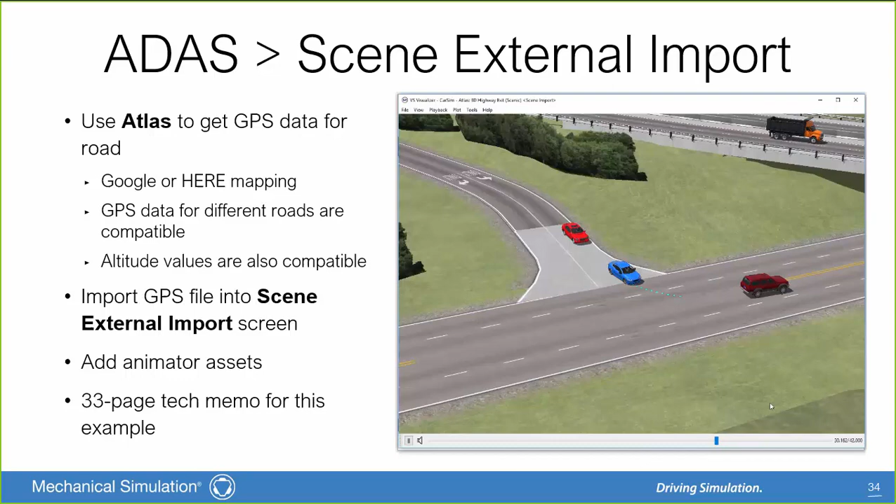There's paint on the road that's built in that you can select from. It changes from asphalt to concrete, back to asphalt. We've got the overpass and the ground under it, kind of showing what it looks like.

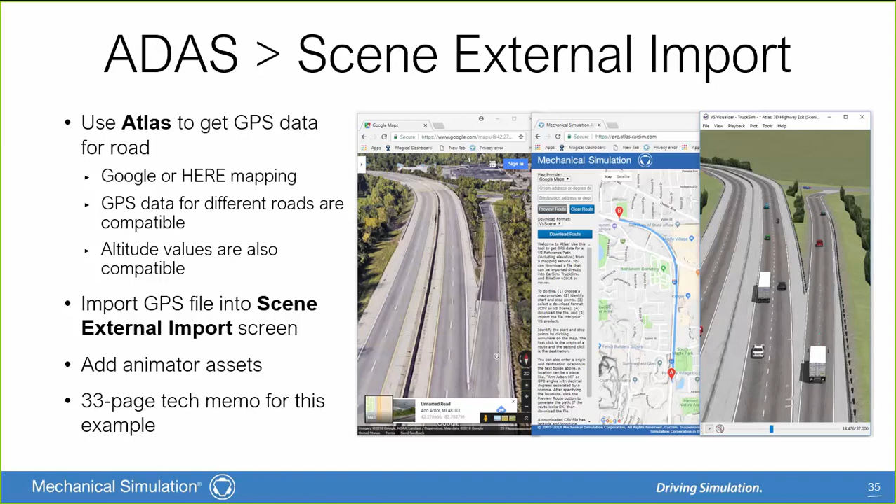So this was provided in 18.1 with a 33-page memo. We've improved the interface a lot, so it takes much less time to do this with 19.0. You start out with something that you find from Google Maps or another viewing service, go into Atlas, and end up with something that's in CarSim, TruckSim, or BikeSim.

So Atlas is one tool. The other service that we support is HERE, and besides using Atlas to get access to HERE data, they have an ADAS RP database that they provide. If you have it, we have a plugin that works with that.

We have a scene builder tool that we added a year ago that I want to show next, and this is the direction that we're going for making complicated scenarios real quickly. We'll go and show this.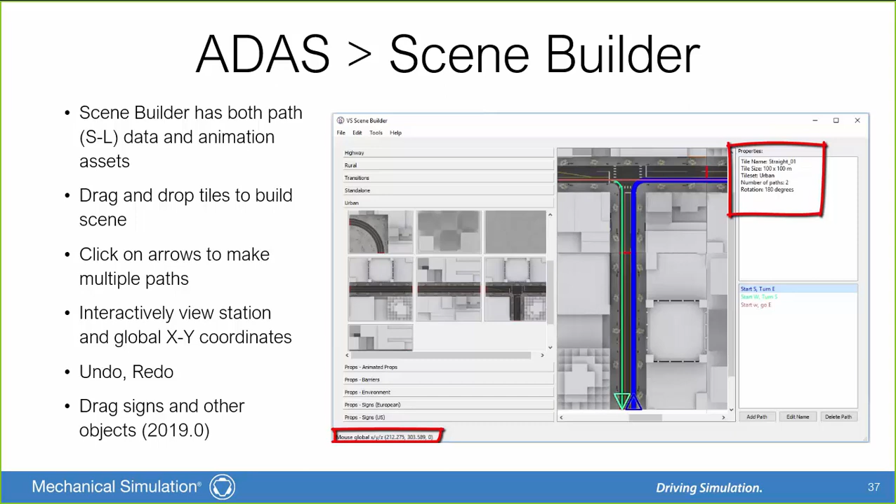I've made a new path here, and I can get SL coordinates or XY coordinates just by moving a cursor over there. I'll write down the X and Y coordinates where I want to put a stop sign and some people.

So this is kind of abstract, and now you see that when we do a video preview, this is an urban environment that's pretty complicated. These are the X and Y coordinates where I want to locate a stop sign. These are S and L locations for locating a pedestrian.

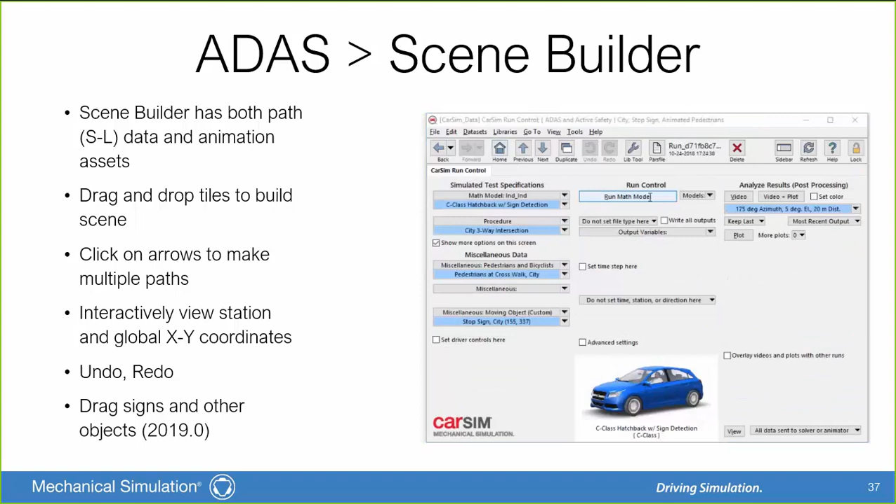And so this is what we end up with. This is real similar to what we saw earlier with the walking pedestrians and the bikes, except we've got the nice detailed urban environment here.

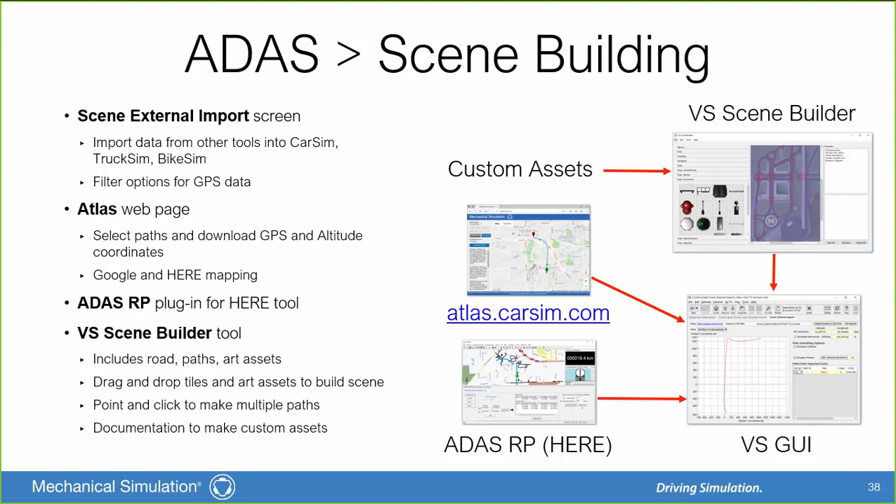When we introduced the scene builder, we provided documentation, so if you have artists on staff, you can make your own custom assets.

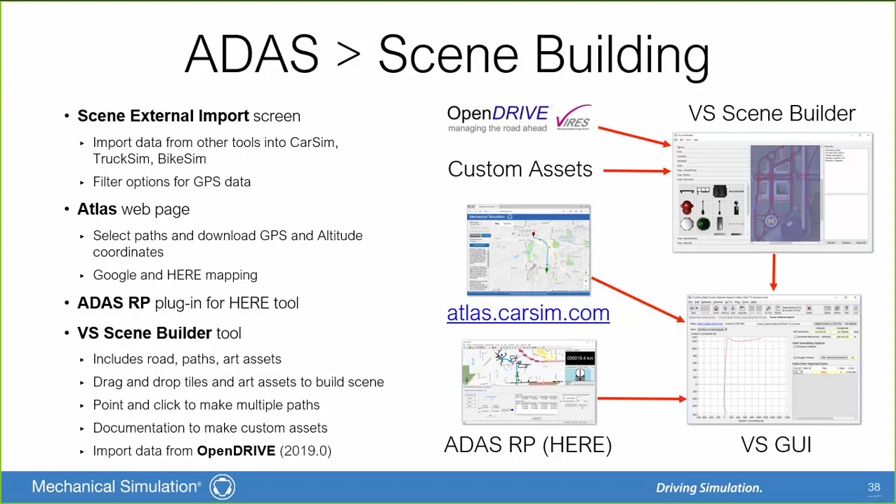And with 19.0, we've added compatibility with OpenDRIVE files. I'm going to show how you do that real quickly. Miscellaneous OpenDRIVE - go up here and do scene builder.

So this is a live thing. We have tiles for highway, rural, transitions, standalone. This is M-City. If you want to get M-City in here and want to build paths, we've got hundreds of points here to connect paths and make them easy.

How do I get rid of that? We've got our animated things, our environment things, signs. We'll go back up here to OpenDRIVE, drag it in here.

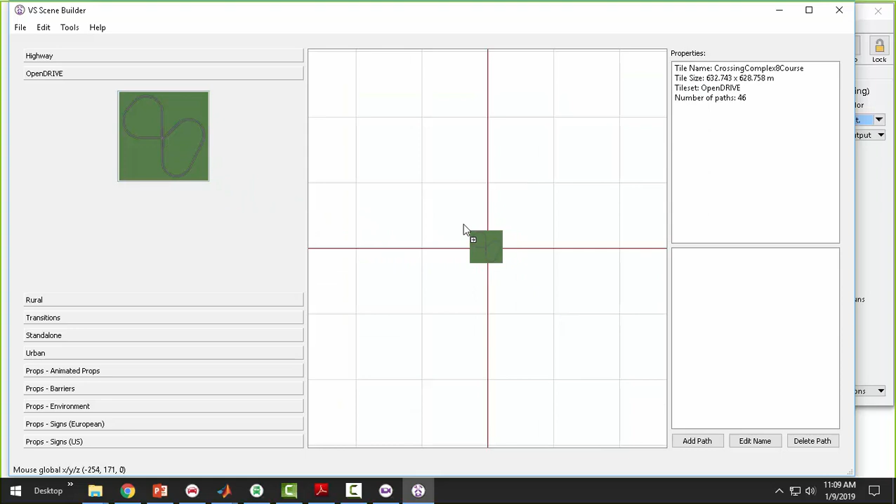And I'll add a path in OpenDRIVE. We'll start here. It's a very confused path, but you'll get the point. I'll stop it, call it Mike. I've got to export it.

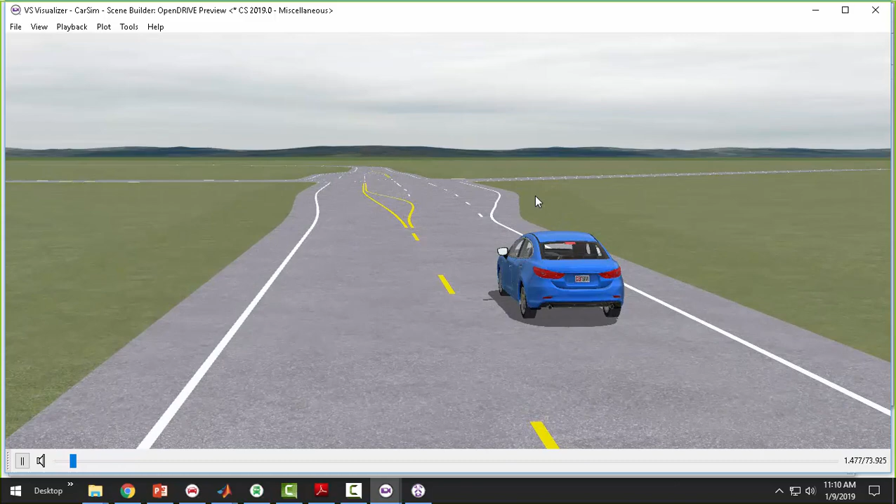Okay, so here's the one that I just imported. Run it. And view it. And so here we are. We've got the lines and the textures. I know I'm running late, so we'll go kind of quick and see the whole thing in there.

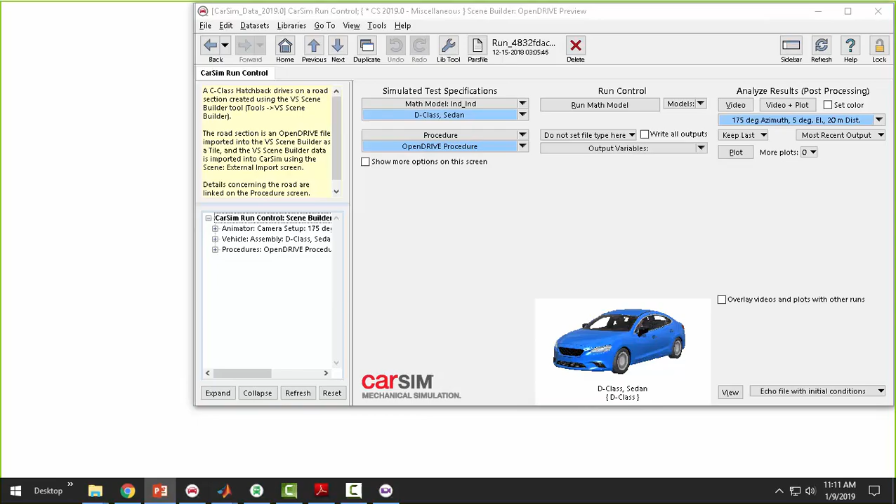So we do support importing OpenDRIVE now and getting complicated things from there pretty simply. Now the last thing I want to talk about is how we interface with other graphic engines besides Visualizer.

Visualizer is what you get with any of our products. It supports hardware in the loop. We have full-featured plotting capabilities, but it's to complement our stuff. We don't have any 3D editing or motion editing in it, or 3D ground. You get that from the CarSim, TruckSim tools. It has basic lighting effects, but the good thing is it's automatic. It's the easiest thing to use there is.

Another one that we're being used with is rFactor Pro. That's a graphic engine targeted for automotive engineers. It's a derivative of a video game called rFactor that was developed in Ann Arbor by Jeremy here and some of our software development guys. So we're familiar with that. The professional version is a UK business, and they mainly provide fairly detailed databases for racetracks, test facilities, urban centers. They're very good. They're also very expensive.

The animation quality is similar to ours. It's a little bit better. They have day, night, and rain. It's kind of a turnkey solution. If they make a database for you, you can run it, and it's ready to go. If you want to make changes, you might have to hire them to do the changes.

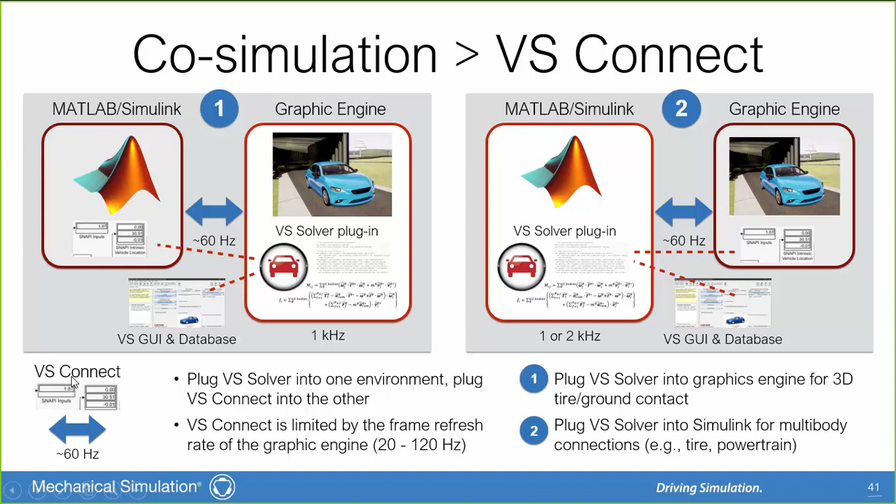CarSim can plug into either one. Plug into Simulink, you've seen that many times. That's over here on the right, method 2. And then we have to have something else that plugs into Unreal. Or over here on the left, we can have CarSim plug into Unreal, and then we have to have something else that plugs into Simulink. Well, the something else is called VS Connect, and that manages the communication.

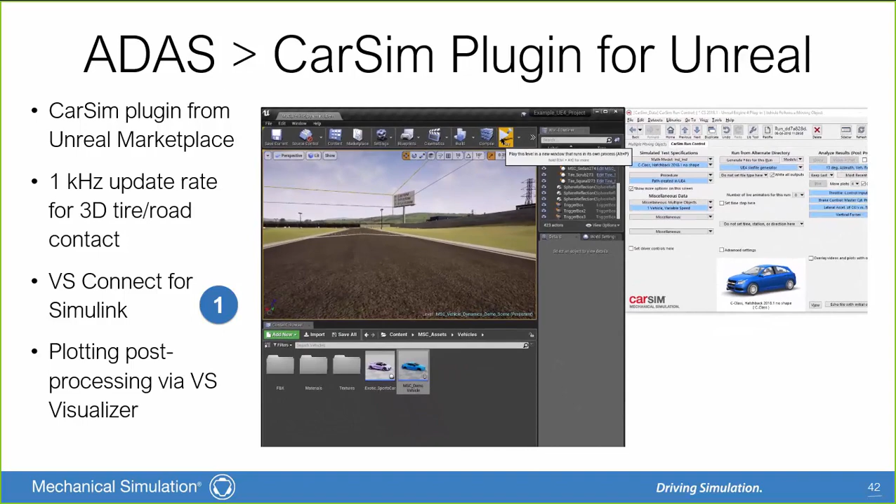I'll show in the next slide here is method 1. We will run with CarSim plugging into Unreal. Now the nice thing about when it's plugged in, we have a very fast communication rate. So we'll be getting information from the ground at a kilohertz. So the tires are getting really updated information. Simulink is only communicating when there's a frame refresh, which is about 60 hertz.

We're doing a simple ADAS, or a simple adaptive cruise control here. So the blue car is following the red car. The controller is getting updates at 60 hertz, which is enough to do that. The tires are getting updates from the ground at 1000 hertz. So this is our method of getting Simulink and Unreal working together.

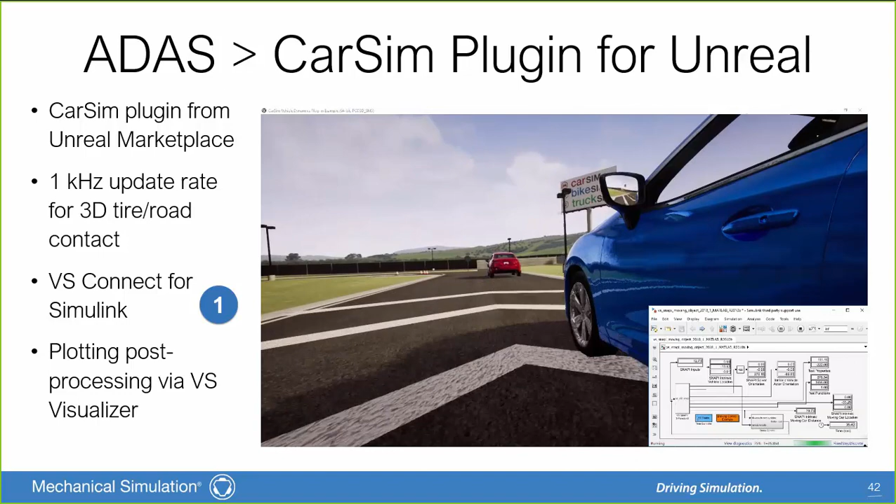Now after we showed that, some of you with trucks said, how do I do TruckSim with this? And is there a faster way, can I have the vehicle model communicate with Simulink faster and Unreal faster? So we've completely redone it for 19.0. Instead of having the CarSim plugin, it's now the VehicleSim Dynamics plugin. It includes three parts: CarSim, the complete CarSim model and all the things that CarSim supports, TruckSim and all the models it supports, and VS Connect. We've also changed the architecture, the way we communicate with the ground, with a new API called VS Terrain API.

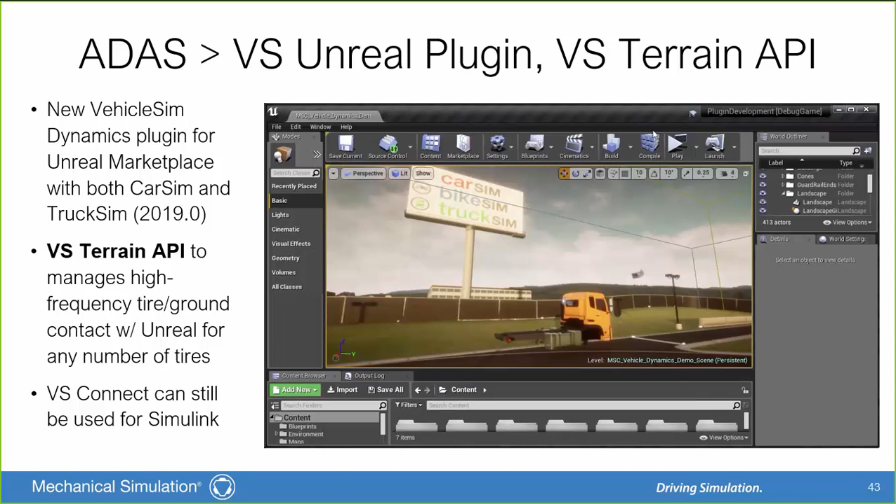And it's being generic here. It can get high frequency input regardless of where the vehicle model is, and we don't care how many tires there are. So that lets us support TruckSim and CarSim with trailers.

Here's an example, and I asked them to make an example that was something we couldn't do with Visualizer. So it's real dramatic lighting here, big shadows, it's got reflections, and the thing that we want to look at is the tires, that when we go on an uneven surface, they're behaving just as they would in any other truck simulation. There's no unwanted craziness or vibration. So this ground is all created in Unreal. The TruckSim is the same TruckSim that you would be using at any time.